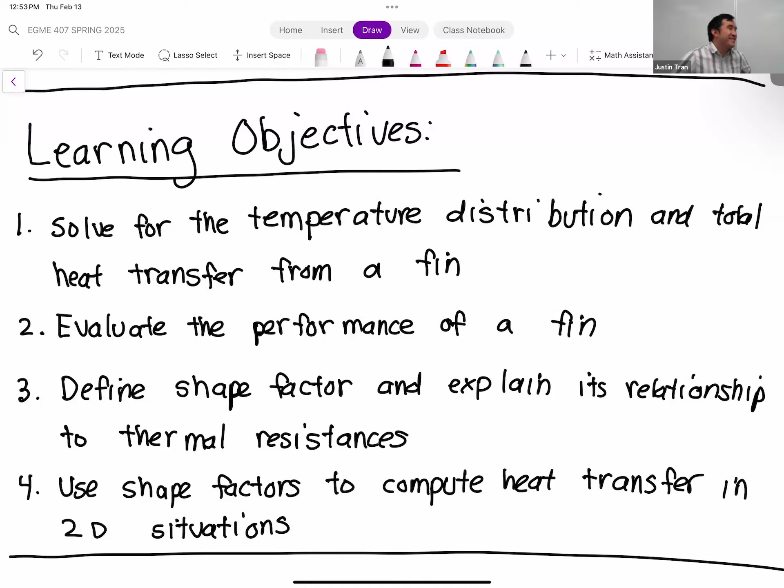Yeah, that's what I was thinking - it's too far, how can it transfer heat? Because heat doesn't transfer well in air, and space is just a bunch of non-solid material. So there's solid, liquid, and air - air would still allow some heat transfer, right? It's probably radiation, or something in space we don't fully know yet, but it's probably from the sun. Is that related to pressure? So space has no pressure, right? Does that mean the heat wave transfers faster with no pressure?

It's not about pressure, it's more about matter. In air there are still molecules - there's monomolecules - and those molecules can transfer heat through conduction or convection. But in space, there's no matter at all, it's just empty. So in those cases, radiation transfers better because there are fewer molecules to refract or block it. But also, in a vacuum, radiation is the only kind of heat transfer you can get, because it's impossible to get conduction or convection in a vacuum.

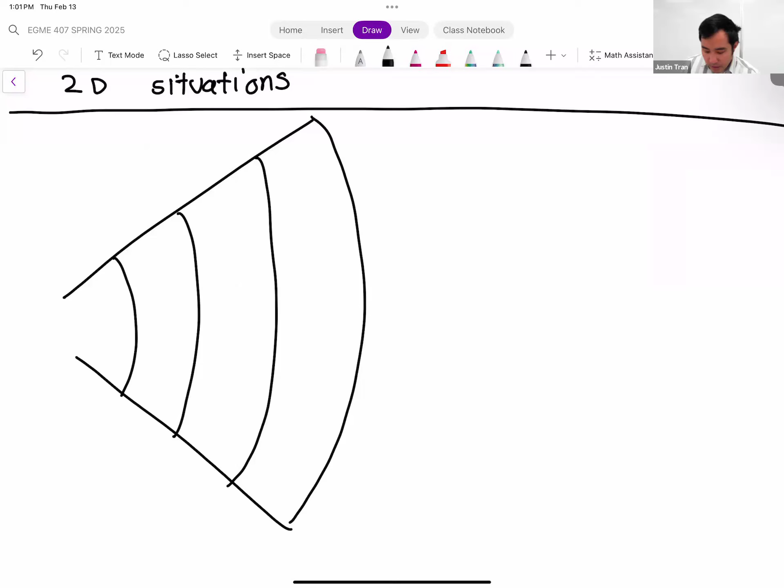Let's say we have 3 layers here, so we have Ka, Kb, Kc - 3 different layers, 3 different materials. In this situation, you would use a different resistor for each layer, so each layer you can plug in a different value for K.

Let's say this is a sphere. The thermal resistance for a sphere is 1 over Ri minus 1 over Ro, divided by 4 pi K. So here's where you plug in for K, but for each layer, you would just plug in a different value of K for each one.

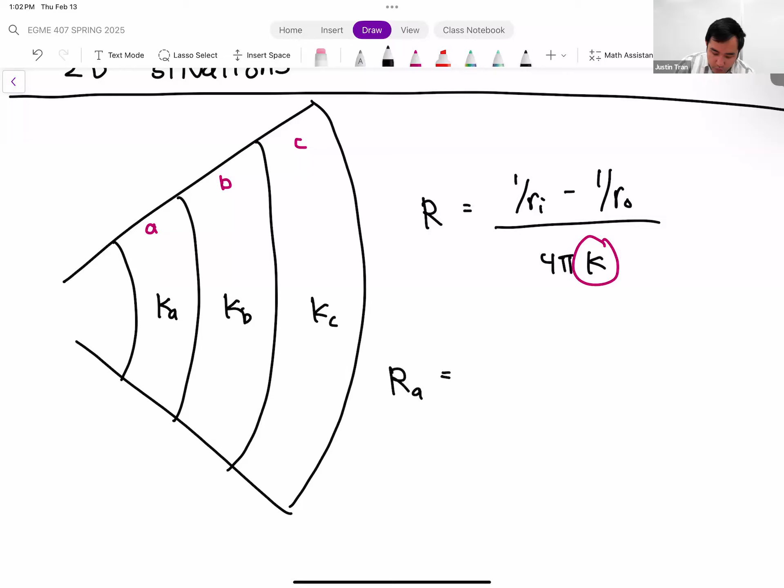So for layer, we'll call this layer A, layer B, layer C. You'll have separate values for Ra. Let me draw some radii here - we'll call this R1, R2, R3, R4. So the resistance for layer A is 1 over R1 minus 1 over R2, divided by 4 pi Ka, because Ka is the thermal conductivity of that particular layer. And then you have a separate resistance for layer B and layer C.

And then when you draw your whole circuit, you'd have 3 resistances - one resistance kind of represents each layer. So Ra, Rb, Rc. And then for each one, you can plug in a different value. Does that answer your question?

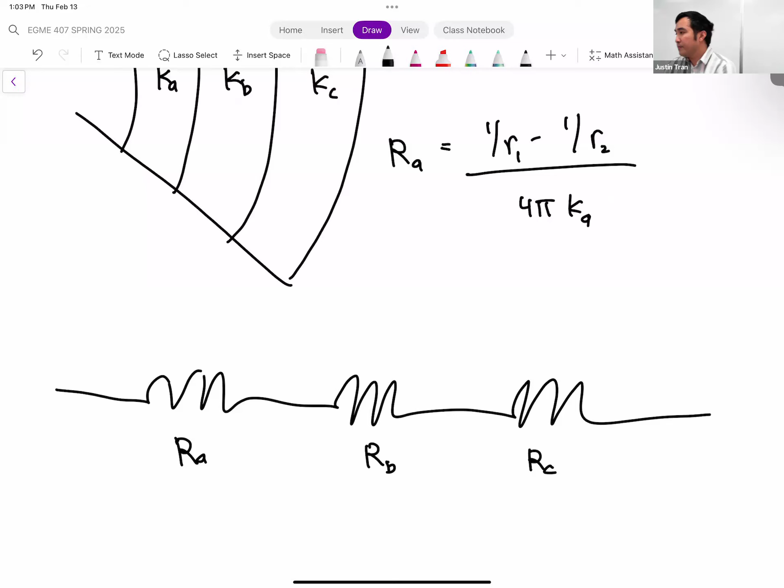Oh, just because I was talking about the critical thickness. Oh, critical, I'm sorry, I missed that one. So for the critical thickness, you would only do it for the outermost layer here. Yeah, because the other ones, they're not on the outside. Okay, I'm sorry, I misinterpreted your question. It's okay, thank you.

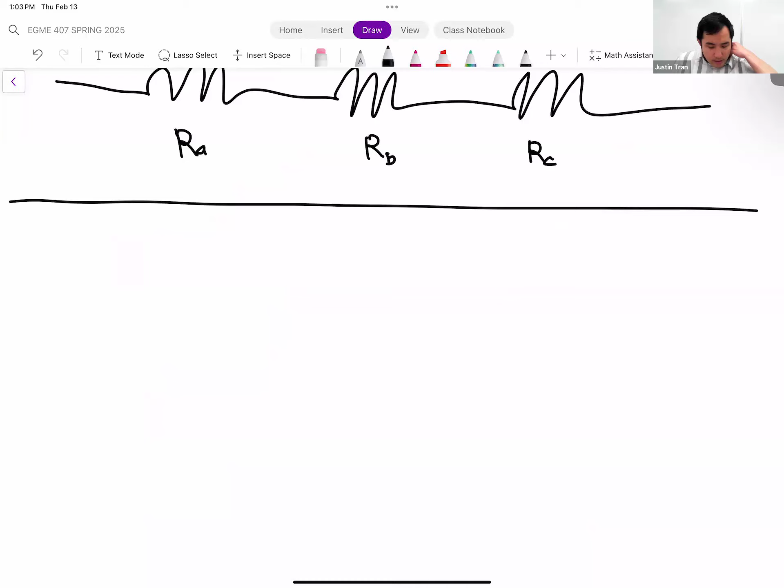So what we were talking about last time was this idea of a fin. Fin is just a short word to describe what we call an extended surface from a system. A fin is something that is very common because if you work on the thermal side of these complex engineering systems, a very common issue is that your system is just producing too much heat. Whether you're working on an engine or on electronics, there's a lot of heat that you need to offload to the environment in order to keep your system cool.

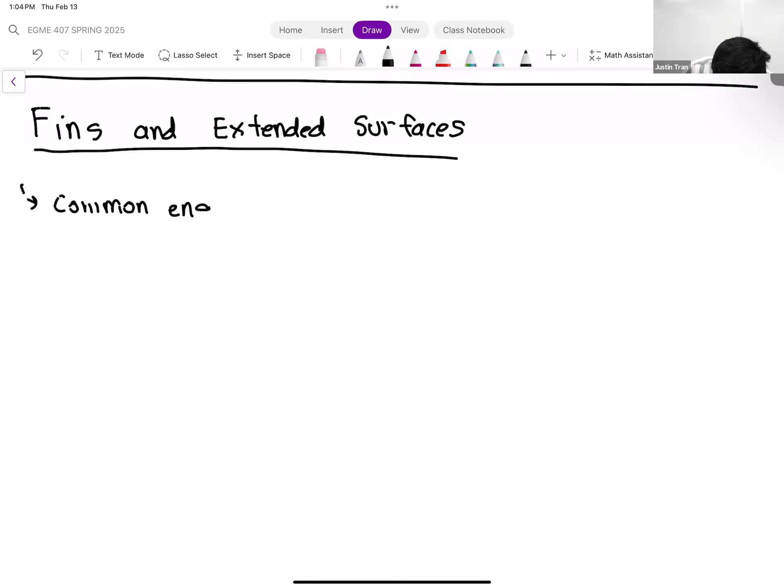One strategy that's often employed to do this is to basically increase the effective surface area of your system so that there's more opportunities, more surface area for convection cooling to occur. So that's the entire premise of a fin or an extended surface - to make these structures to increase the surface area so that more convection can occur to cool your device or your system.

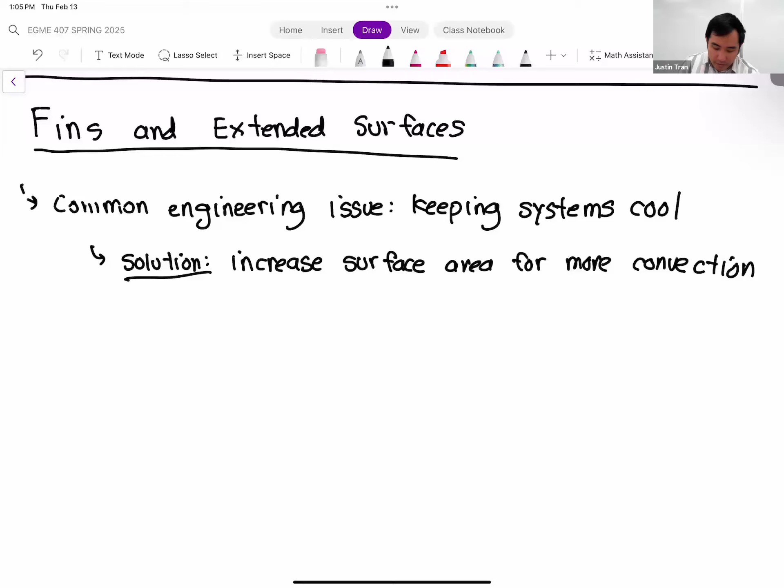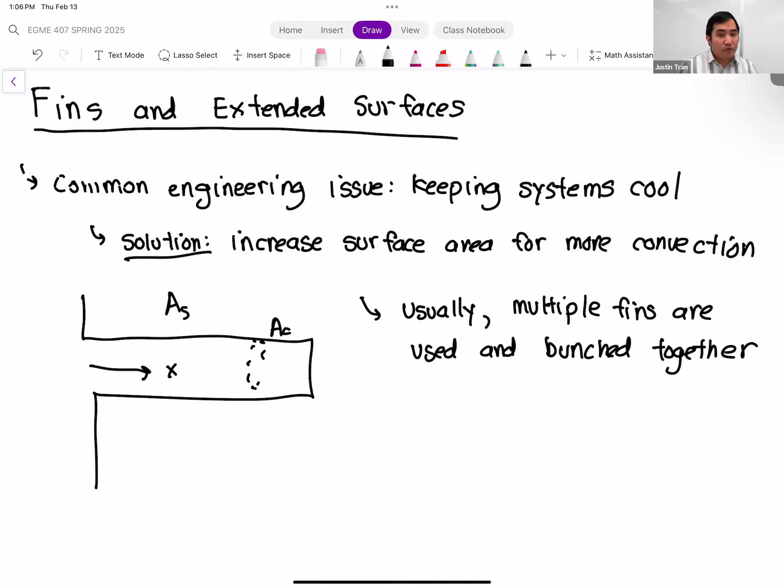This is probably a lot more common that you're going to see in a lot of engineering systems, where you have a bunch of these fins or extended surfaces coming out. So you'll have multiple fins - if you look at it from the side, it might look something like this. If you look at it from above, you might have multiple fins that are kind of stacked like this. So this would be the side view, and this the top view.

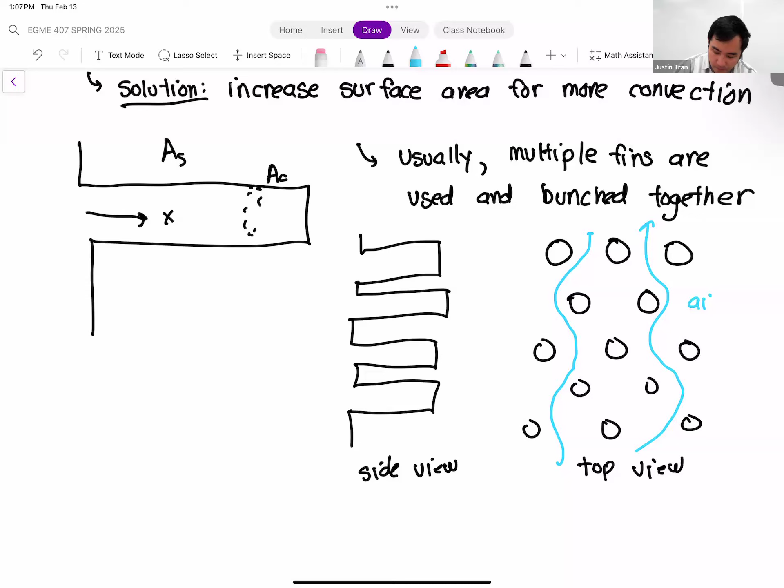Okay. And then what's going to happen in these situations is that air is going to flow through these fins, or some kind of fluid is going to flow. Usually it's air, just because your device is probably exposed to air at some point.

All right, so just because of time, we're not going to get into the theory of having multiple fins stacked together. We're mostly just going to focus on one. But I did want to highlight this because one thing I really enjoy when I learn something new is seeing how it's applied in the real world. If you look inside your engine or your computer, you're not going to see a single fin like this, even though all the theory we're going to discuss is mostly just for a single fin. You're going to have multiple, but know that a lot of the intuition we build up from the single fin applies for multiple fins as well.

It gets actually really interesting because how you arrange your bank of fins can affect the airflow through the fins, and that's going to affect the convection heat transfer as well. So there's a lot of really interesting theory there too, it's just we don't have enough time to go through it. But I did want to mention that before we get too much into the weeds of the calculations.

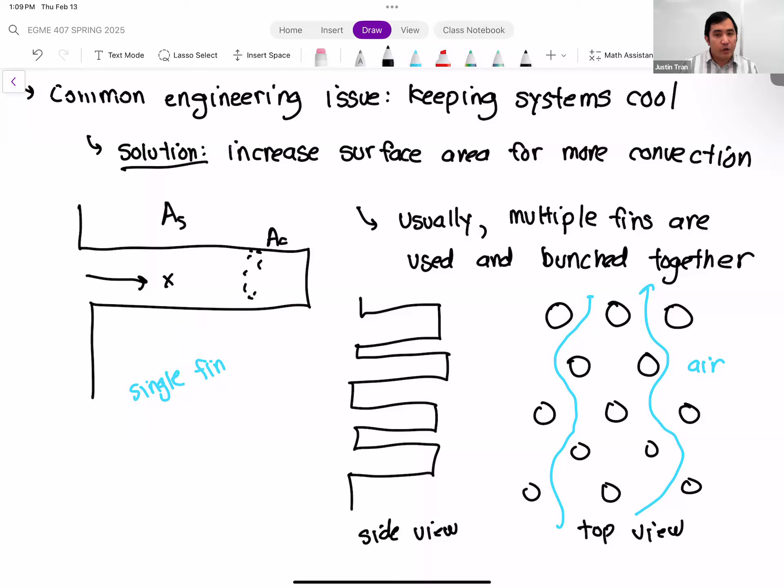Okay, so that's where we're at. So we are looking at fins, and we want to develop some kind of theory or some concepts so that we can better understand fin performance and how to enhance what aspects of the fin are going to lead to better heat transfer or better performance.

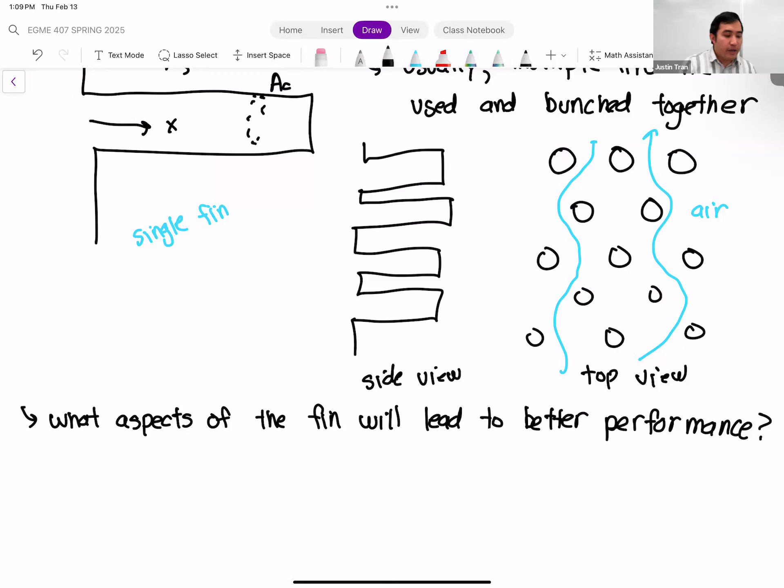That's one of the main questions we're going to answer today. I want you to keep that in mind as we're going through the equations and deriving stuff. Any questions on this so far?

Okay, good. All right, so let's pick up where we left off last time. Last time we were right in the middle of deriving the fin equation, or the fin heat equation.

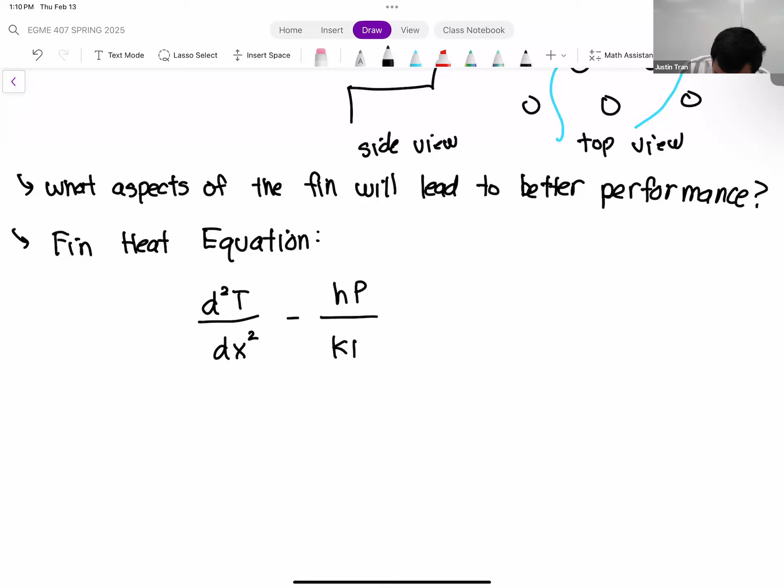Okay, so the fin heat equation looked like the following: d squared T dx squared minus h times P divided by K AC, multiplied by T minus T infinity. All that's equal to 0.

And then right before we left, we said that while this equation is perfectly valid to solve, to make it a little bit easier for us, we're going to make a change of variables.

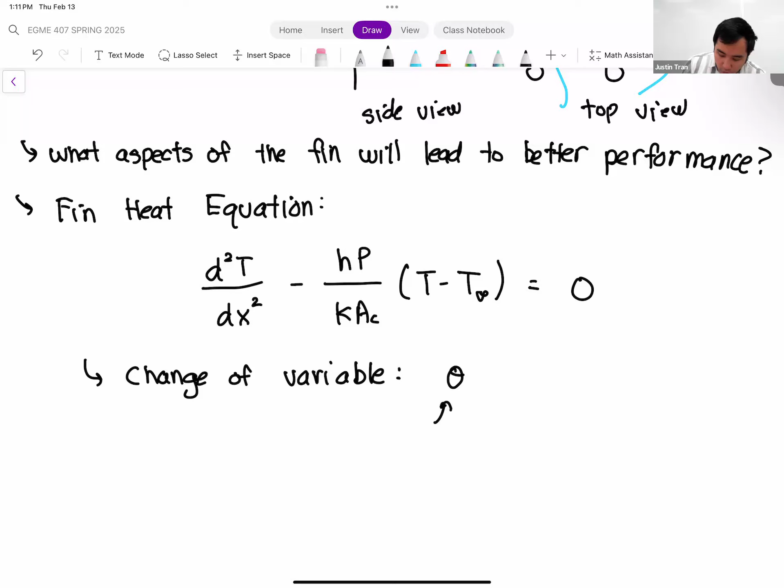And so the change of variable that we're going to do is we're going to substitute in for T. So we're going to define this new quantity called theta. This theta is what's called the excess temperature. What this is, is the difference between the temperature at the fin minus the fluid temperature, T infinity.

And so what this is going to allow us to do is plug in directly for this quantity right here. So this theta is just going to slot in right there. What that does is make this equation homogeneous, which is nice, which is good. And because the change of variable we're doing is essentially just an offset—we're not making any kind of multiplicative change of variables, it's just a subtraction—when we take the derivative of theta...

...second order derivative of theta with respect to x. Since T infinity here is assumed to be a constant, when we take the derivative of this, all we end up with is d squared T dx squared, which means we can just plug this right in for the second order derivative up here.

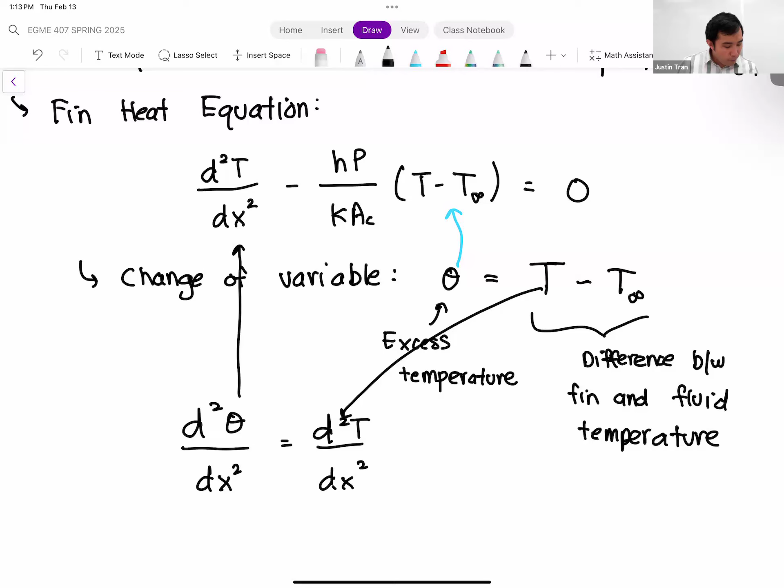All right, so if we perform that change of variables, we end up with the following: d squared theta dx squared minus HP over KAC, multiplied by theta, is equal to 0.

All right, and then what we have here is a second order linear ordinary differential equation with constant coefficients, right? And so this is something that we can solve. If you think back to your 250B class or your 308 class, this is one that we can solve using the characteristic equation.

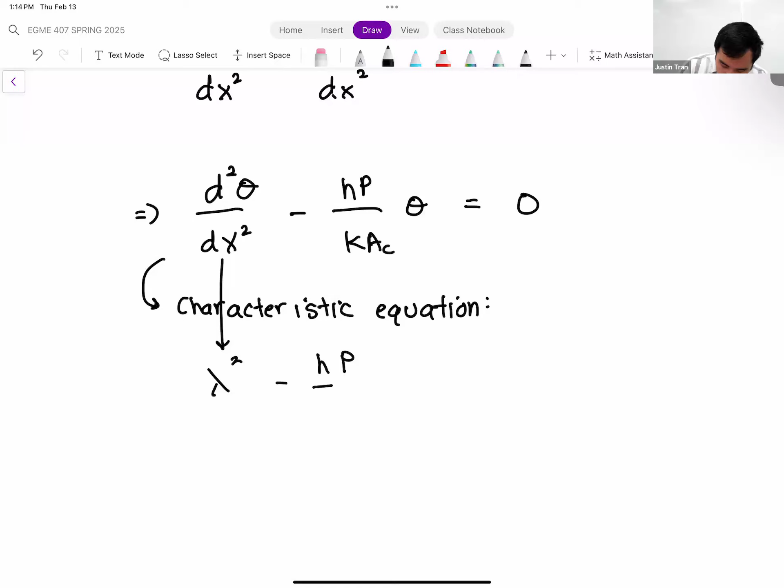Okay, so the characteristic equation, remember, we basically are going to solve for the roots of this equation. So for every derivative here, we're going to replace it with a symbol, lambda. For the second order derivative, we're going to replace it with lambda squared. And then there's no first order derivative terms, so we don't have any lambda terms. And then we're just going to do minus HP over KAC is equal to 0.

Okay, so let's solve for the roots of this characteristic equation. This one's pretty simple, we don't need the quadratic formula for this. We can just add HP over KAC to both sides and take the square root. So we get lambda is equal to plus or minus square root HP over KAC. That means lambda 1 is equal to positive square root HP over KAC, and lambda 2 is equal to negative square root HP over KAC.

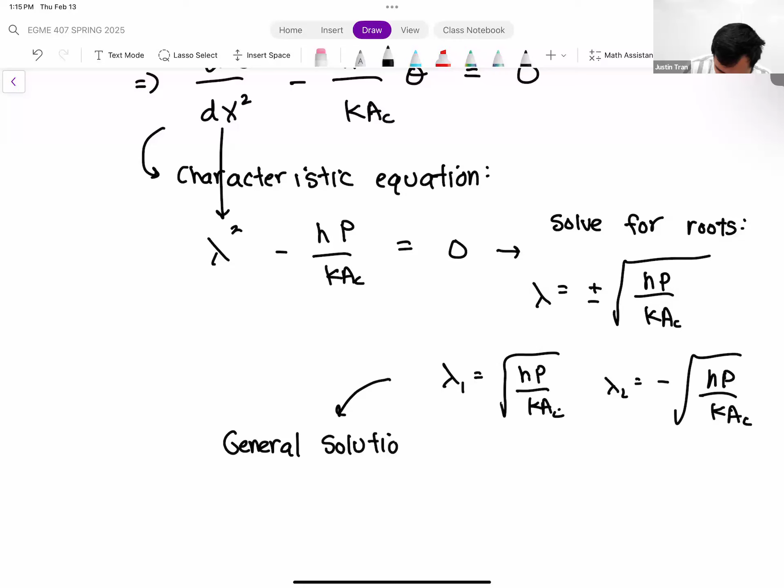All right, so now that we have our two roots, we can form our general solution. The general solution to this problem, theta of x, is equal to — since our two roots here are real, we're not going to have any oscillation, so there's no sine or cosine. We just have simple exponential solutions. So our theta of x is equal to C1 e to the lambda 1 x plus C2 e to the lambda 2 x. And again, this is because we have two real roots.

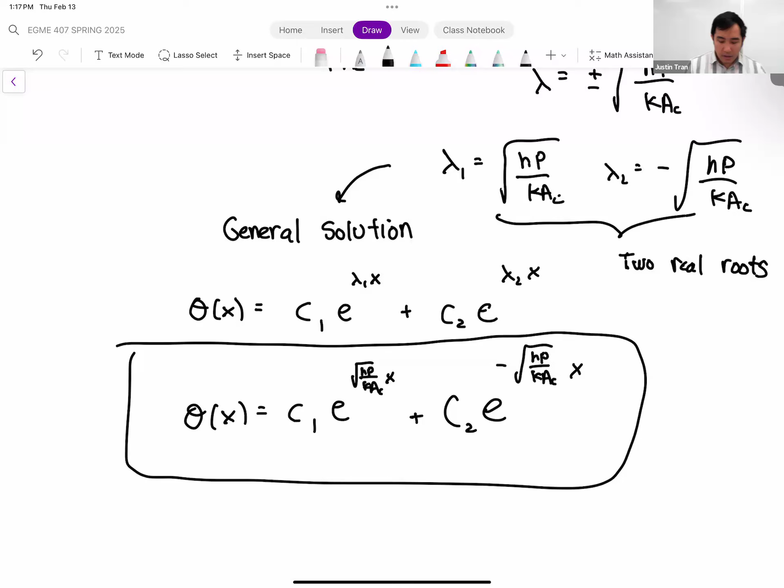Let's go ahead and plug in from lambda 1, lambda 2. We have theta of x is equal to C1 e to the square root HP over KAC times x, plus C2 e to the minus square root HP over KAC x. And this expression that I've boxed right here is the general solution for the temperature distribution, or how temperature varies along the length of a fin.

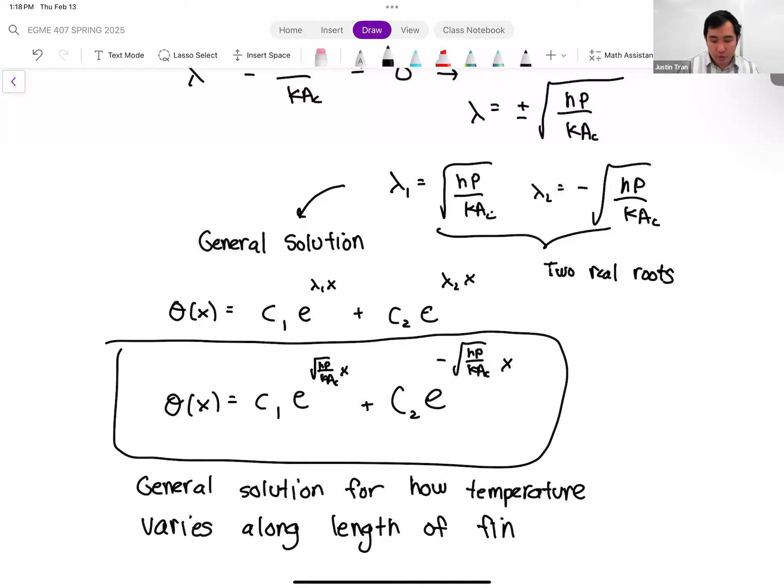Any questions on how we got this result here? Okay, good. All right, so this is a good start, and we can see from here that our solution is exponential in nature. But this is still just a general solution, and this is not the full solution yet. So if you recall from your previous math class, 308, 250b, at this point, in order for us to solve for the full solution, we need to apply boundary conditions and solve for the constants C1 and C2.

So if you notice, that's kind of a big theme of this class — solving differential equations and applying boundary conditions. So what are the boundary conditions that we're going to apply in this case? Luckily, for this part, the boundary conditions aren't really going to change from problem to problem. I know that was a point a lot of people asked questions about on the last two homeworks, but luckily for fins, we're only going to be looking at one given situation. So these boundary conditions are going to be the same for every situation that we look at.

So the first boundary condition that we're going to apply is we're going to apply a known temperature at the base. The base of the fin is where x is equal to 0. Let me go ahead and draw our figure for our singular fin one more time. So our fin looks like this — we know the x direction goes down the length of the fin. The base of the fin is where the fin basically connects to your larger engineering system here. So this part where I've circled is where x is equal to 0.

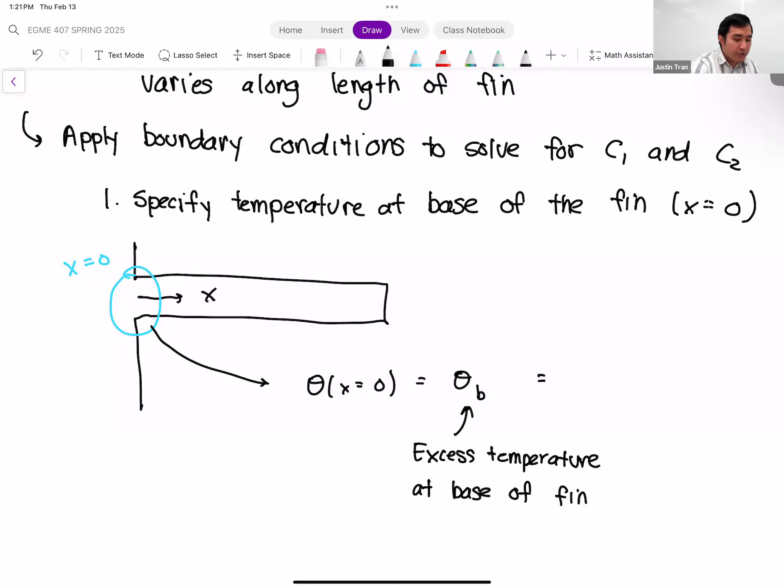And so this first boundary condition is going to specify that we basically know the temperature at the base here. So when x is equal to 0, theta is going to be something, we'll call it theta b — where theta b here is the excess temperature at the base of the fin. Usually this is something that's going to be known. So if you're designing a thermal system, or engineering a system that's going to require a fin, you probably have knowledge of what the surface temperature is at the base of that fin. So this is usually something that's known.

Okay, so this is not something we're making up or assuming. This is usually known in all situations I can think of, especially for electronics, which is where I know a lot about this stuff. It's usually known what your surface temperature is, or at least you know what the worst case scenario for that temperature is going to be.

Okay, so theta B here is nothing more than just the temperature at the base minus T infinity. Remember, this theta is not temperature by itself, it's excess temperature, so you have to subtract T infinity as well. So that boundary condition is pretty straightforward.

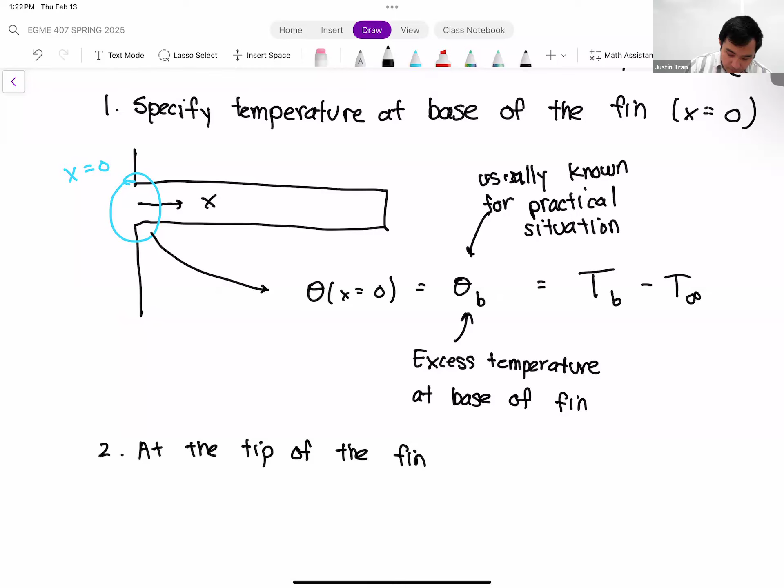The second boundary condition pertains to the thermal situation at the tip of the fin. So we have one condition at the base, and the other boundary condition is going to be at the very, very tip. If we assume that the fin has a length L, that's the total length of our fin, then the tip of the fin is going to be when X is equal to L.

It's just because I think it's one of those things where we could go through the math, and it's not a question of whether you guys can do it or not, you can definitely do it. But I think some of the important messages I wanted to share about fins kind of gets lost in the sauce a little bit. So we're going to focus on just the simplest tip condition.

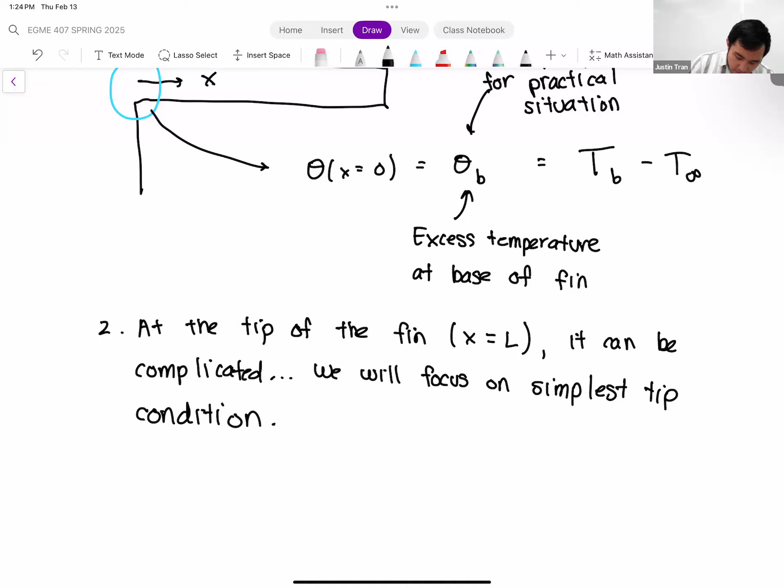Which actually is pretty reasonable, and this is one thing where it's the simplest one, but it's also one that usually makes sense in a lot of cases too. So the tip condition we're going to be assuming is that the fin is sufficiently long.

Right, so let me go ahead and draw the fin here. So what does it mean for a fin to be very long, or how does that actually help us? Question: so like it's not heat soaked and it's like a gradient all the way through kind of thing? Close, I think you have the right idea. So when the fin is very long, basically what's going to happen is that at the very tip, if the fin is sufficiently long, the tip of the fin is going to be the same temperature as the fluid. So it's basically going to lose enough heat so that the tip is the same.

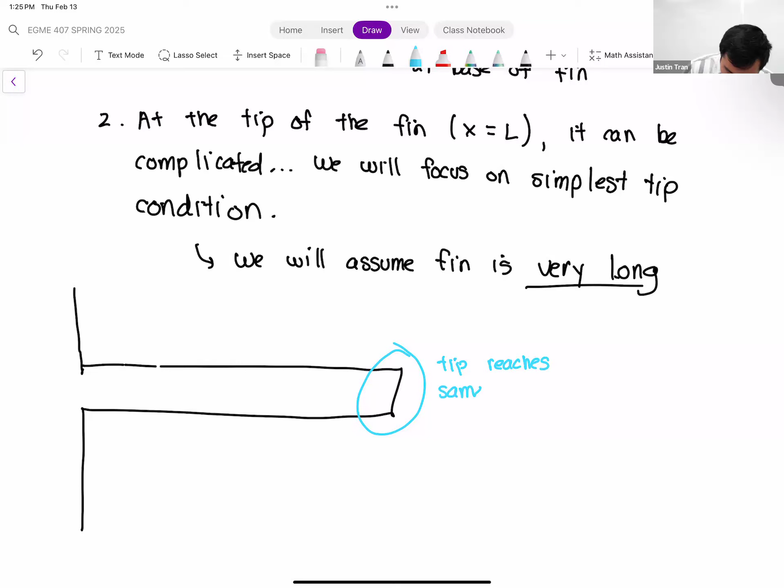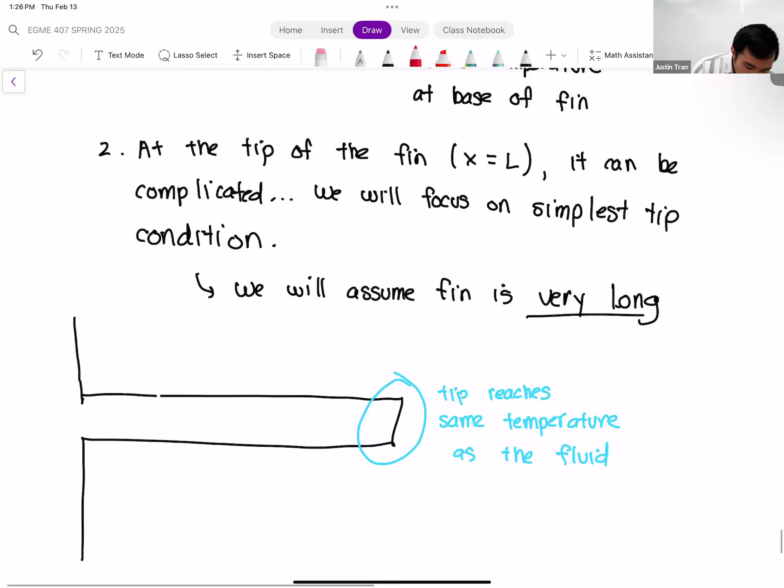Okay, so why is that the case? Think about intuitively what's happening. When you have a fin like this, most of the time, there are reverse situations too. There are some situations where you use a fin to actually heat up your structure, but the vast majority of cases, you have a very hot base. So theta B here is very large.

So in most cases, you're gonna have a large base temperature, and your fin is going to be cooling as you go along the fin. What's happening is that the fluid is passing over the fin itself, and a lot of that heat is actually leaving the fin, it's going into the fluid. So as you go along the fin, what makes sense is that the temperature in the fin is actually going to drop down the length of the fin.

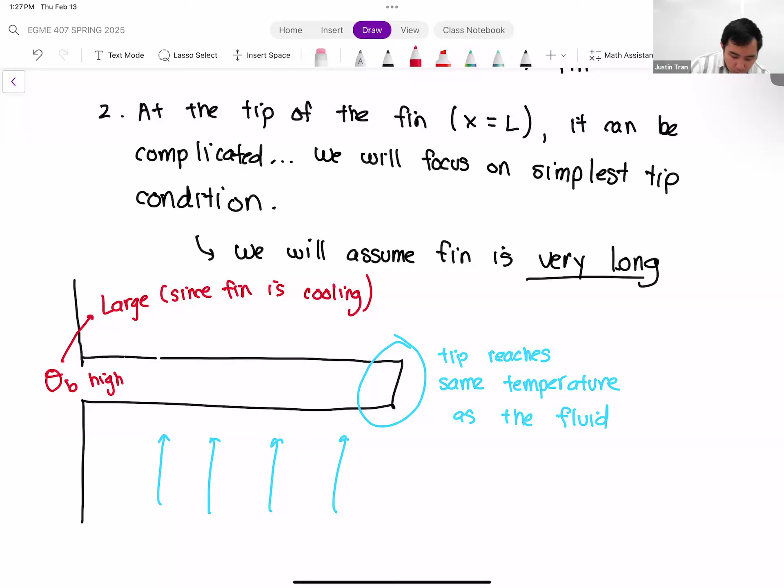So at the very beginning right here, your temperature is very high. But then as you go along, it's going to become slightly less high, and then less high, and then maybe medium, and then low. Obviously I didn't draw this fin long enough, because the fin should be long enough so that as you go along, the temperature decreases more, eventually decreasing to the smallest it can possibly be. And the lowest the temperature can possibly be for this fin is the same temperature as the fluid, because it's impossible for the fin to reach a temperature lower than the fluid.

And so if you have a really long fin, what we say is that at the tip of the fin just reaches the same temperature as the fluid.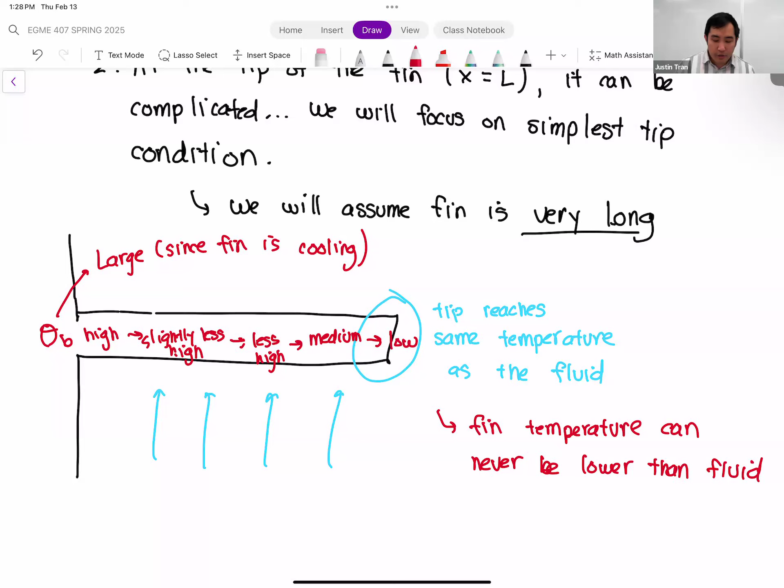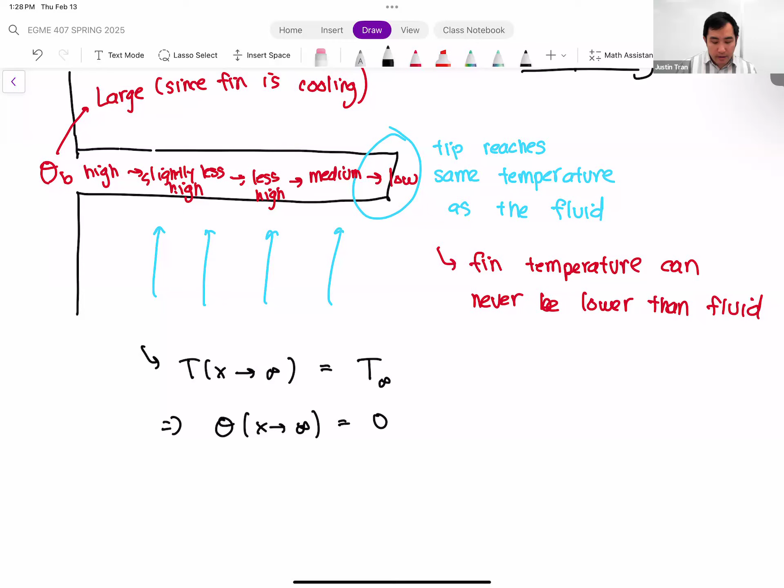Mathematically, this is quite simple to implement. What we're saying is that the temperature, as x approaches infinity, is going to be equal to T infinity. And so the excess temperature as x approaches infinity is going to be 0. Remember, excess temperature is just the difference in temperature between the fin and the fluid. So if the tip of the fin matches the temperature of the fluid, the excess temperature must be 0.

Any questions on the tip condition here? All right, so those are our two boundary conditions. We have this, and condition 1. Condition 1 is theta when x is equal to 0 is equal to theta base.

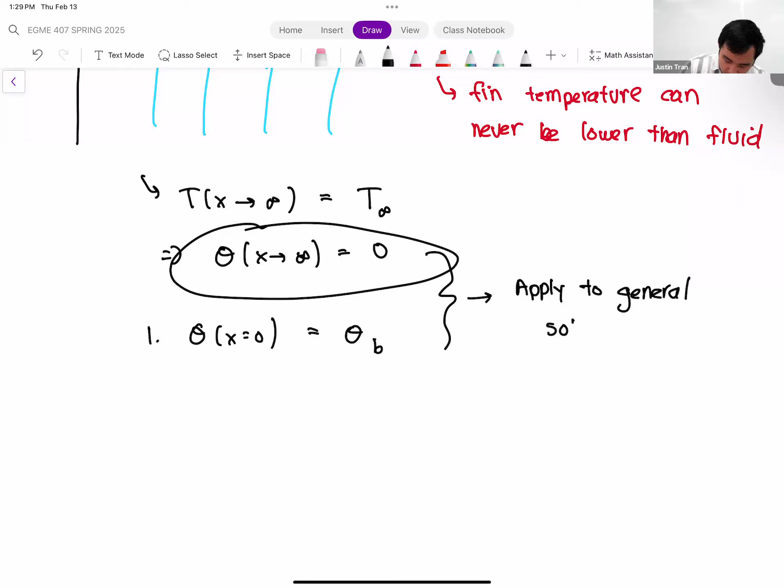Okay, so let's apply these two conditions to our general solution. Our general solution, theta of x, is equal to C1 e to the positive square root of HP over KAC x, plus C2 e to the minus square root of HP over KAC x.

So by applying these two boundary conditions, we can solve for our arbitrary constants C1 and C2. Let's actually apply the tip condition first, because that one's going to simplify things the most.

If we apply our tip condition first, we're going to say theta as x approaches infinity is equal to 0. Let's plug in x. Well, we can't plug in x equal to infinity, but let's just say we're going to take the limit as x approaches infinity of C1 e to the positive square root HP over KAC x, plus C2 e to the negative square root HP over KAC x.

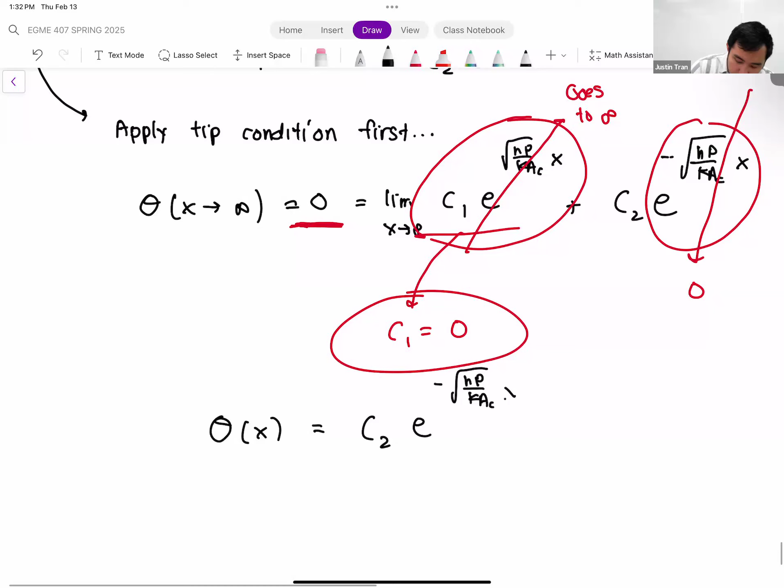And so by doing that, our general solution now is theta of x is equal to C2 e to the minus square root HP over KAC times x.

Can you explain how C1 is equal to 0 one more time? Sure. So we know from our tip condition that basically our temperature at x equal to infinity has to be finite, because we're assuming our fin is really, really long, and we have to have some kind of finite solution there. The C1 term has a positive exponential, so as x goes to infinity, that term is also going to blow up. So in order to be consistent with this, C1 has to be 0, or that term just can't exist.

Any other questions on this part here? What does P represent again? P is the perimeter.

I have a question, but I feel like it'll be answered if we do an example with numerical values. Yeah, we're going to do an example with numerical values after this. Thank you. Yeah, we're almost done with the derivation. That second exponent is negative, right? Yeah, second exponent is negative.

Okay, so let's apply the base condition now, and then we're going to do an example right after that.

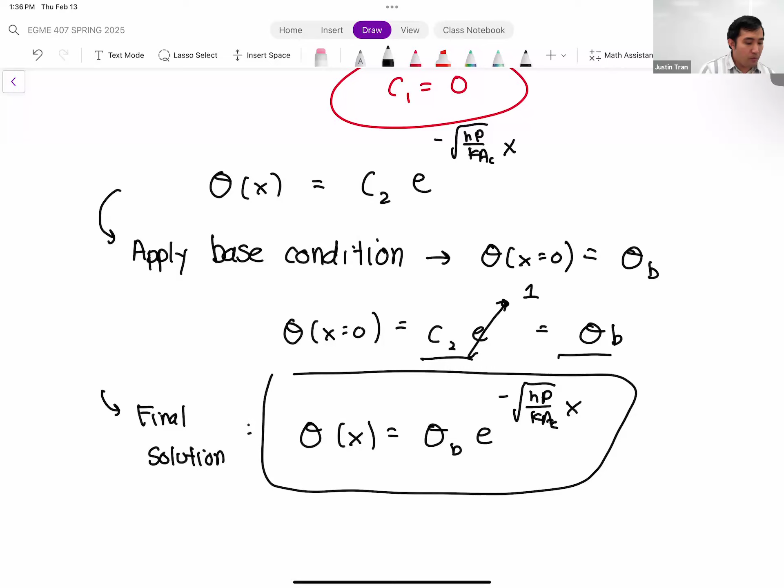Okay, so let's put some numbers on this. We've been going through derivations for a while, so let's see what this looks like in a problem.

Now, one thing you have to consider a lot for the fin: all the theory we just covered, we haven't really made any assumptions on the cross-sectional shape of the fin itself. But that can actually play a really big role. So when you look at examples or problems with fins, the problem will usually tell you what the cross-sectional shape of that fin is. So for this example, let's do a very simple case and look at a cylindrical fin.

So a cylindrical fin has a circular cross-section. So our fin is going to look like this. Now we're being a bit more clear about the cross-section because it's a cylinder.

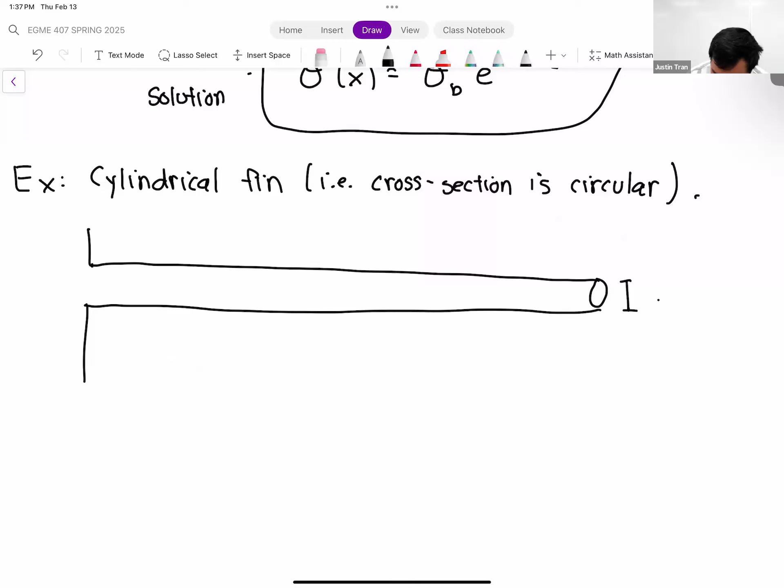Let's say the diameter of this fin is 5 millimeters. Let's say it's made of a material with a thermal conductivity of 180 watts per meter Kelvin. So it's a fairly conductive fin, probably made of some metal.

Let's say that the temperature at the base - now this is just flat temperature, not excess temperature - is 100 degrees C. And let's say the fin is cooled by ambient air, with an ambient temperature of 25 degrees C and a convection coefficient of 100 watts per meter squared Kelvin.

By the way, I think this may be the first time I'm doing this in the class, but notice how in the denominators for these I'm writing K - this K stands for Kelvin. Previously I put the units as degree C. Degree C and Kelvin are interchangeable, but I think this might be the first time I did it this way in class, so I just wanted to make that clear.

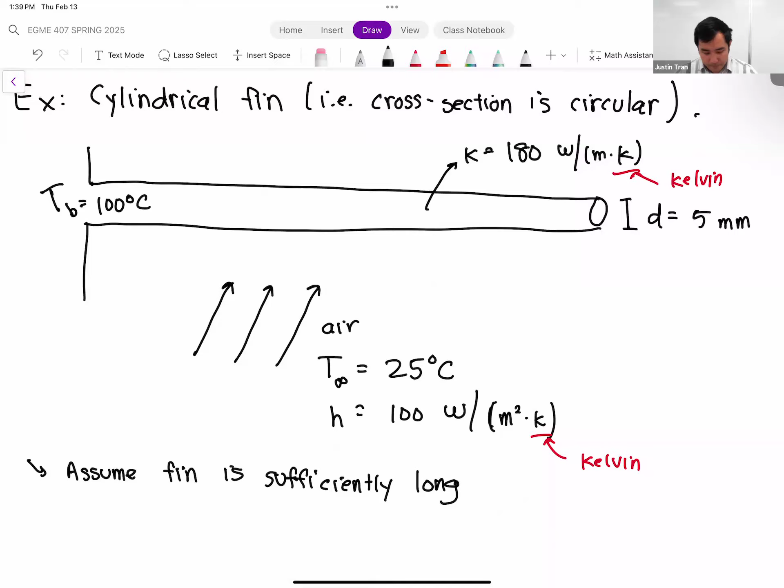So for this fin, let's make the assumption that the fin is sufficiently long, so the tip condition we assumed in the previous part is going to be valid here. So let's answer the following questions.

So this K here is thermal conductivity - it should be lowercase k, and Kelvin is uppercase K. It's just hard to tell because my handwriting is poor. If the K is on the right in the units, that stands for Kelvin; on the left-hand side it's thermal conductivity. Let me make this clearer - instead of Kelvin on the bottom here, let me change this to degrees Celsius.

But on the homeworks you may see Kelvin K, so just be aware of that. They are equivalent in magnitude - they're just offset from each other. Temperature in Kelvin is equal to whatever is in degrees C plus 273.15. But the actual value, if you wanted to go from degrees to Kelvin, you just keep it as 180 - the value of thermal conductivity or convection coefficient doesn't change whether it's Kelvin or degree C.

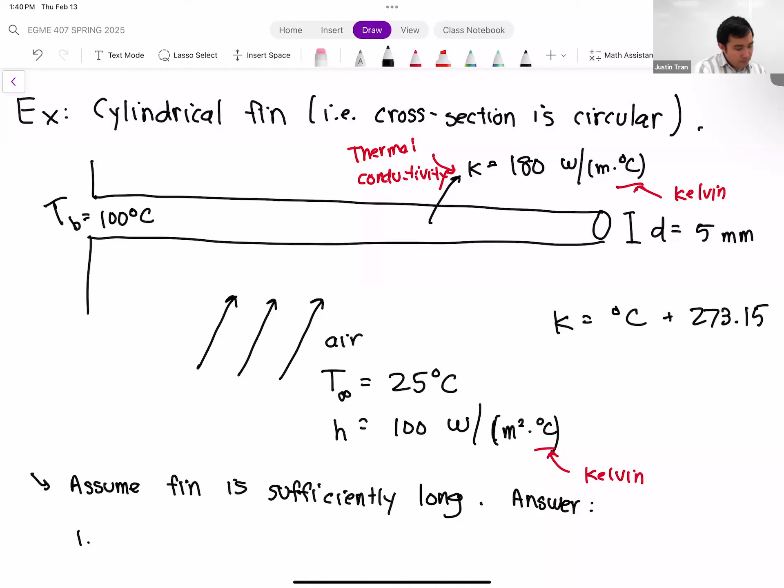Okay, so let's answer the following questions. First one is, let's solve for the temperature distribution in the rod, or I guess the fin, I should say.

Number two, let's compute the total amount of heat transfer from the fin.

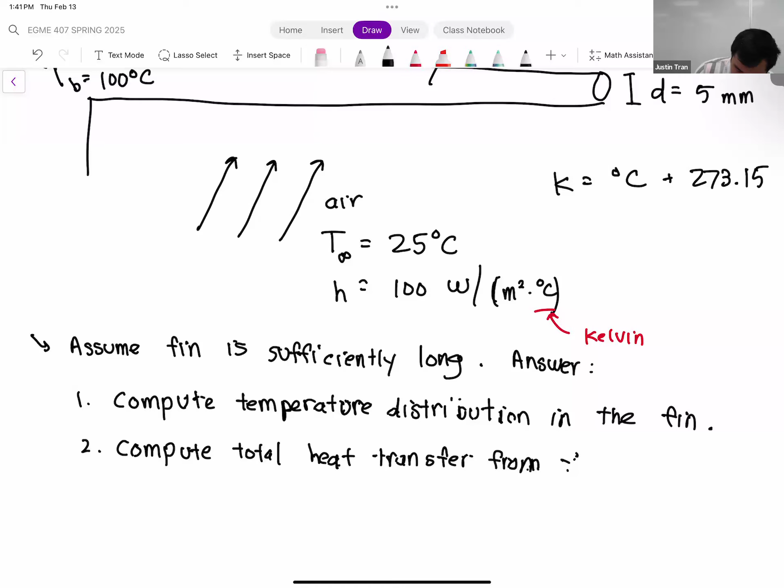And then number three is going to be an interesting one, because we've solved for the solution to the fin equation assuming our fin is sufficiently long. So part three is let's solve for what the theoretical length of this fin should be in order to make that assumption valid - how long does the fin have to be?

Because those words kind of get thrown around a lot, sufficiently long, sufficiently small, infinitesimally small. So let's actually compute it, let's see what that means in this case, and mathematically how we can show that.

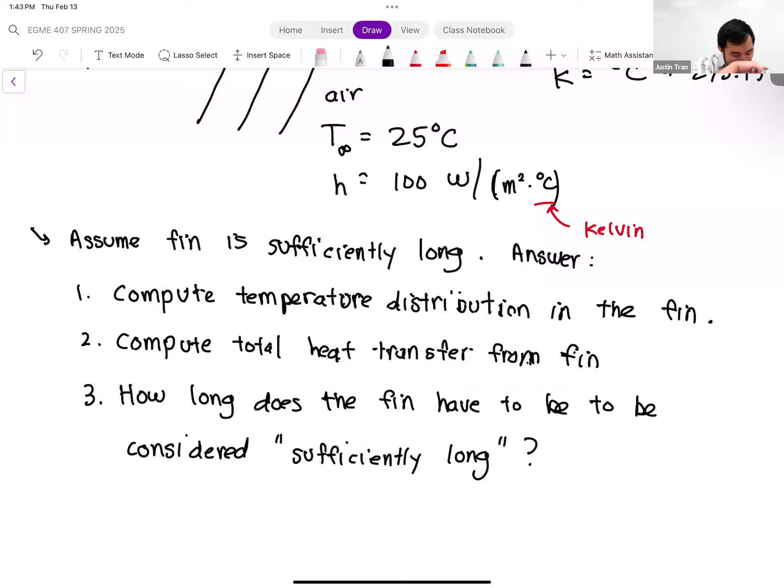All right, so let's start with the temperature distribution. This one is pretty straightforward because we've already solved for it. The temperature distribution in a fin is given by this, what we just finished deriving here.

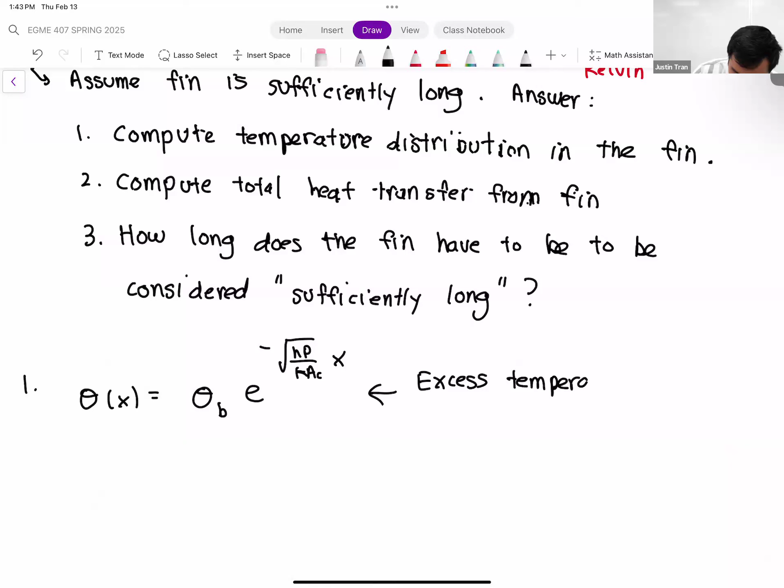So theta of x is equal to theta B multiplied by E to the minus square root of HP divided by KAC times x, okay? That right there is our temperature distribution, or more specifically, the excess temperature distribution. So to get the full distribution here, we just have to plug in for all the numbers.

Quantities like H, the convection coefficient, and K, those are already given to us in the problem, so there's nothing additional we need to compute there, we just plug it in. But we do need to compute values for theta B, for the perimeter, as well as the cross-sectional area.

Okay, so let's start with theta B, that's the simplest one. Theta B here, remember, this is the excess temperature at the base.

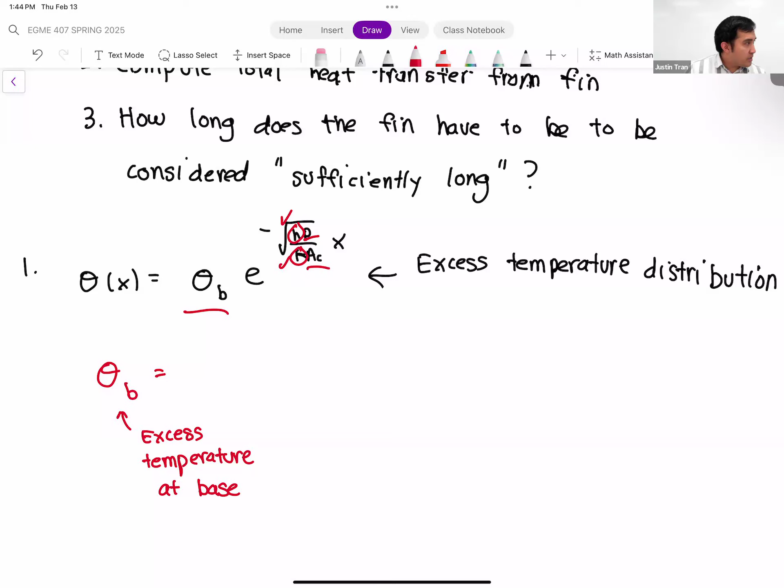In the problem, we're not given the excess temperature at the base, we're given the temperature at the base. So if we go back to the problem, we know the base temperature is 100 degrees C, and so the excess temperature there is going to be 100 degrees C, the temperature at the base, minus T infinity, where T infinity is the ambient temperature of the air. So we have 100, ambient temperature is 25, so we just have 100 minus 25, and so the excess temperature here is going to be 75 degrees C.

Okay, that one's pretty straightforward. Let's compute the perimeter next. Remember when we first started this example, I told you that fins can come in lots of different shapes. In this case, we have a circle, and so the perimeter here is going to be nothing more than just the perimeter of the circular cross section.

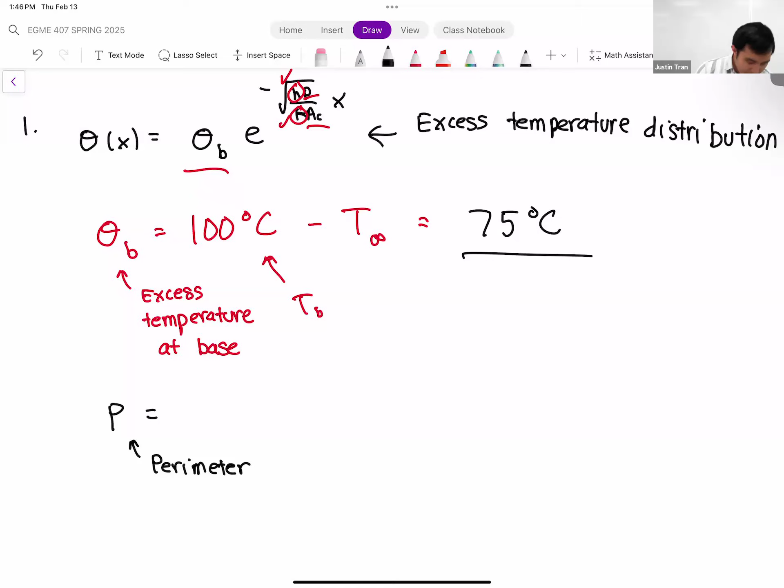Circumference, yes. Okay, so since we have a circular cross section here, the perimeter is just going to be the circumference of a circle, so that's going to be pi. We're actually given the diameter in this case, so it's going to be pi times the diameter, that's pi times the diameter of 5 millimeters.

So 5 millimeters is 0.005 meters, and we're going to compute everything in standard SI. Let me compute this really quick. So the perimeter here is 0.0157 meters.

And then the cross-sectional area, we're just going to take area of a circle, which is pi r squared. We're not given r, we're given d, so it's going to be pi times d divided by 2, squared. And so that is 0.0025 times 0.0025 times 3.14159, so this is 0.00001963 meters squared.

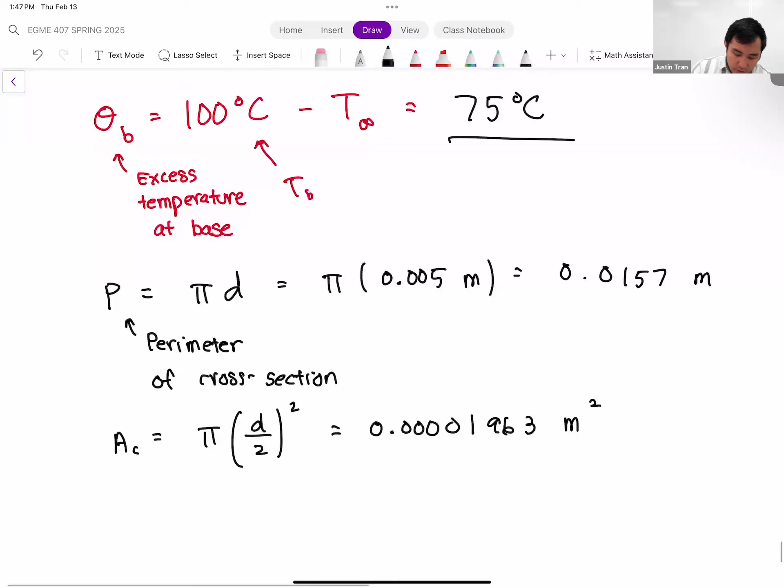Okay, so let's plug all that in. Let me compute the exponent first. So the exponent is square root of HP divided by KAC. We just computed P, we just computed AC, convection coefficient H, thermal conductivity K are all given to us in the problem, and so we plug everything in, we get 21.08. The units for this, if you're curious, is meters minus 1, so it's 1 over meters.

Okay, so we have all of the numbers here, let's just plug it all in. So our temperature distribution theta of x is equal to 75 e to the minus 21.08 x.

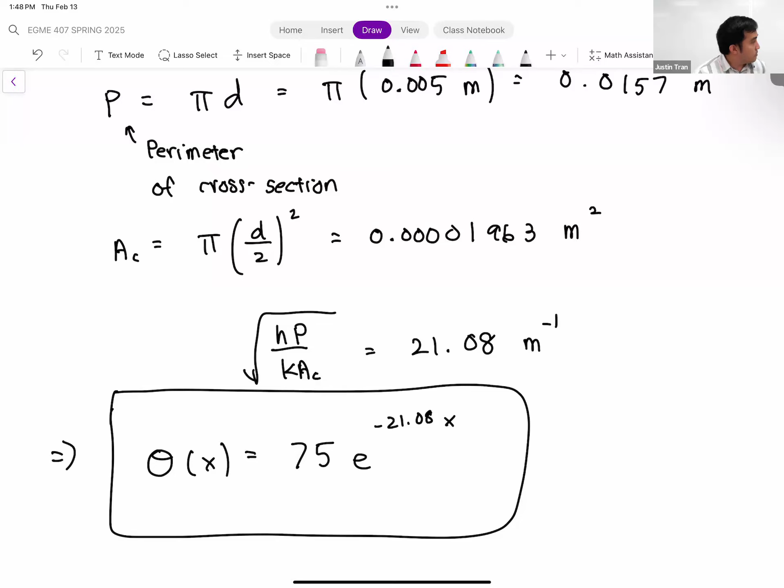All right, any questions on this part here? Okay, so that's part 1 of the problem. Part 2: now that we have the temperature distribution, we can compute the heat transfer rate or the total heat loss from the fin.

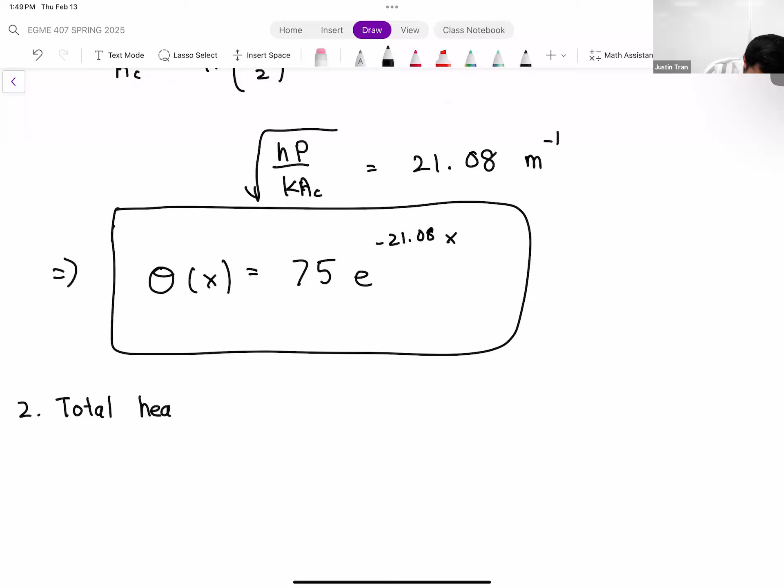All right, so for heat loss, we're going to make use of our handy dandy formula that we've used a lot this class already. Now that we have a formula for the temperature distribution, finding the heat loss is just making use of Fourier's law. Fourier's law states that the heat loss or heat transfer rate for a given problem is equal to minus K times A, dt dx.

Okay, so of course we don't have T, we have theta, but T and theta are essentially interchangeable here. So let's take the derivative of theta,

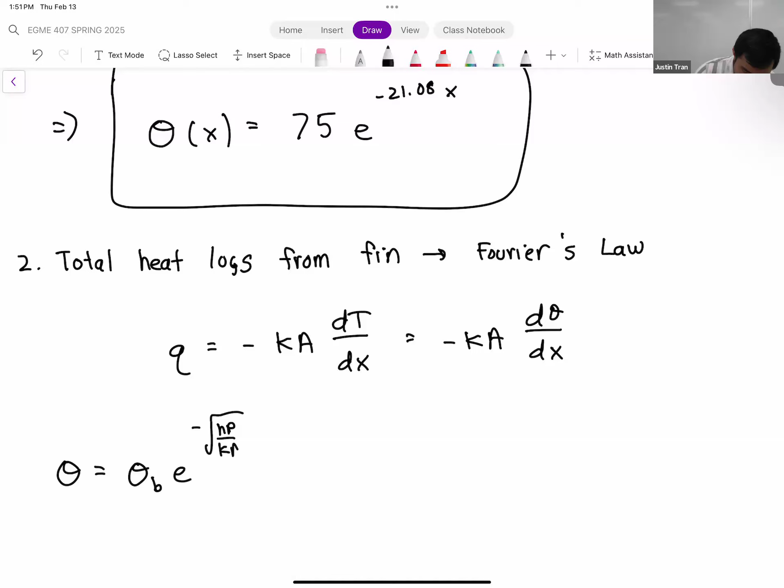which is minus KA d theta dx. This is actually a formula that's very useful, so I'm going to do this in terms of the general theta. If theta is equal to theta B e to the minus square root of HP over KAC times X, if we take the derivative of this, it's equal to minus theta B square root of HP over KAC, e to the minus square root of HP over KAC times X.

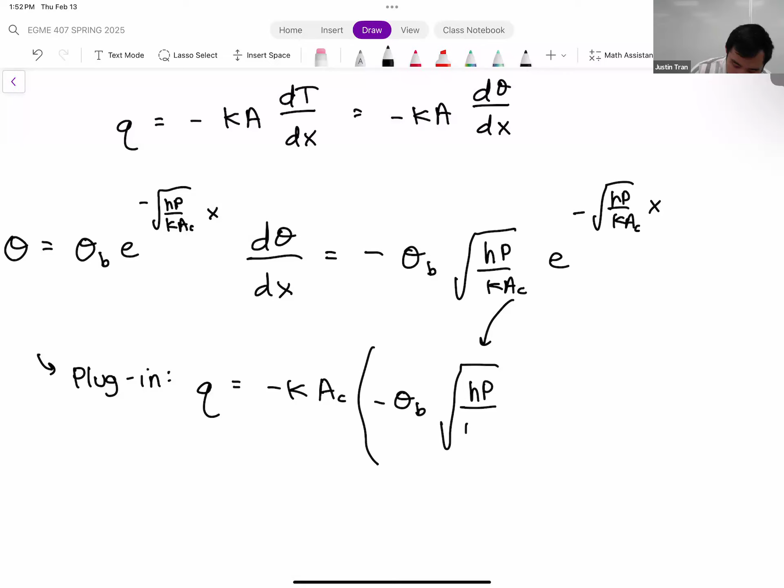All right, so let's go ahead and plug that in. We plug in for this, we get Q is equal to minus K. That area there is cross-sectional area, so we're just going to do KAC multiplied by our derivative. We're just going to drop this guy in here: minus theta B square root of HP over KAC, e to the minus square root of HP over KAC times X.

Why don't you use the general solution that you just solved? So this formula for the heat transfer is going to be useful for every problem. We're deriving it just from the symbols, and then we're going to plug in the values from this problem afterwards. Because in the homework you'll see questions of how to compute the total heat loss, and I'd rather you just have a formula that you can plug into instead of deriving everything.

All right, so let's simplify this. If we simplify, the negatives are going to cancel out. So we have a KAC up top here and a KAC under a square root on the bottom. If you work this out, we're going to get Q is equal to theta B square root -- that KAC actually goes within the square root there -- square root of HP KAC, e to the minus square root of HP over KAC times X.

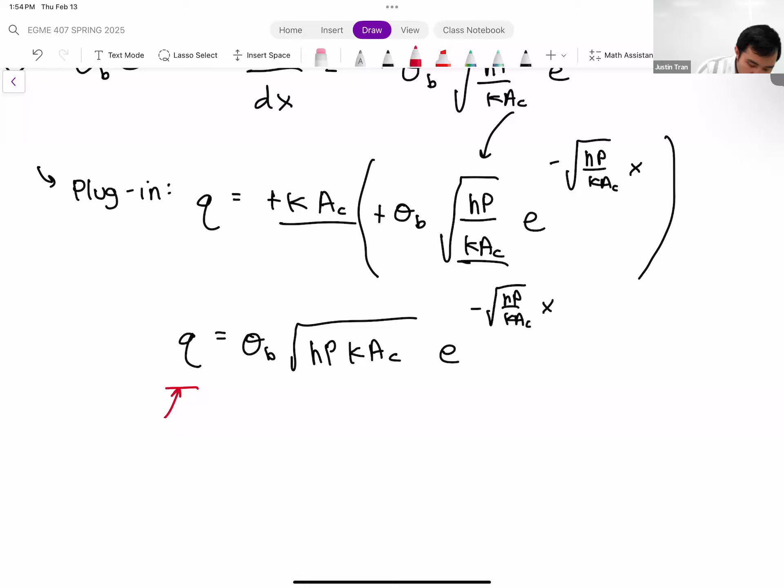So this is good, right? We've simplified this expression quite a bit, but it's still not the easiest to work with right here. Because what do you notice here? This is an expression for Q, an expression for heat transfer rate, or heat loss -- I should say heat transfer rate in the fin.

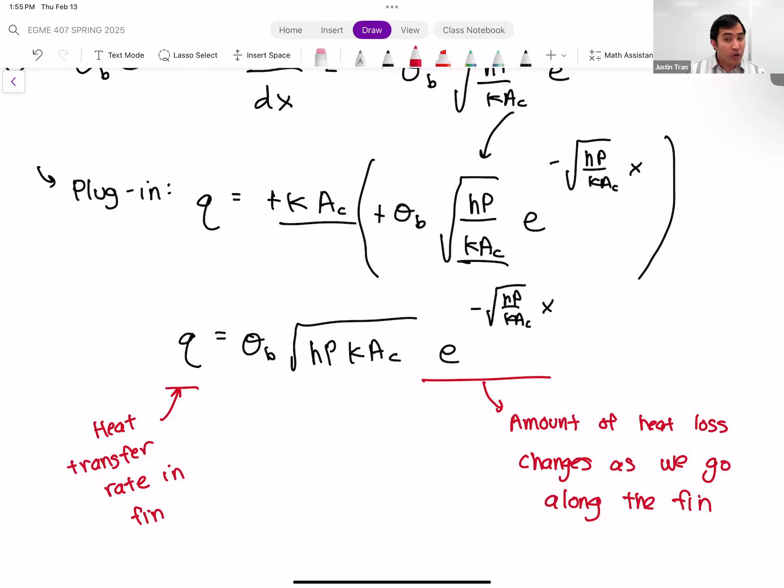But if you look at this expression here, we still have a dependence on X, right? And the fact that this term here still exists means that the heat transfer in the fin changes as you go along the fin. If you remember the figure I drew earlier where the temperature changes, it goes from high to slightly less high to less high to medium -- because the temperature is dropping along the fin, that means the amount of heat transfer as you go along the fin is also going to change.

So if we draw it out, we draw our fin just like this. We have air blowing through it. Let's compare five different values of Q here along the fin -- I'll call this Q1, Q2, Q3, Q4, Q5. And if we go based on the formula above, that means the instantaneous amount of heat transfer coming out depends on where you are located along the fin. So Q1 is going to be greater than Q2, which is greater than Q3, which is greater than Q4, which is greater than Q5.

So most of the heat transfer or heat loss is going to take place at the base of the fin. And then as the fin cools down as it goes along, there's going to be less and less heat transfer.

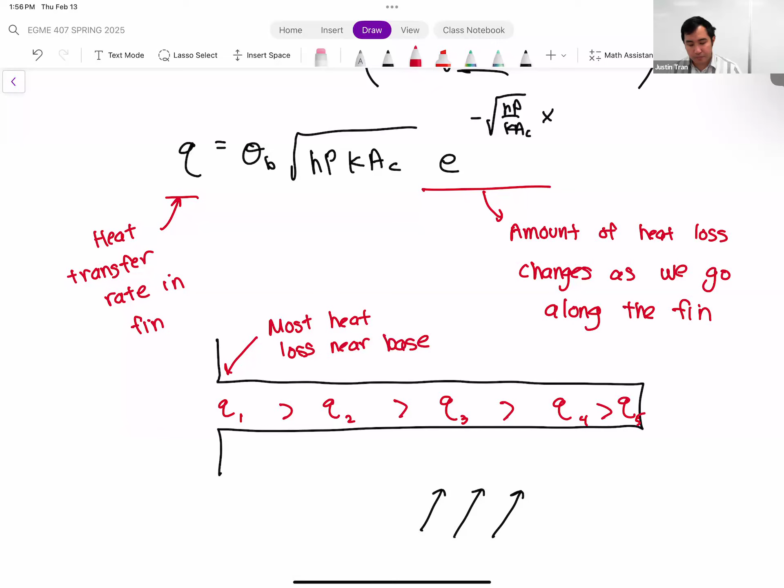And that makes sense, right? Because we know that the temperature is going to be highest at the base. And if we follow the cardinal rule of heat transfer, if the temperature difference is highest at the base, that means the heat transfer there is going to be the highest as well. Hopefully that makes sense -- the more temperature difference you have, the more heat transfer is going to occur.

This formula, because of that, is not that useful to us because it's still a function of x. So what we would like to see is a formula that just basically computes the total amount of heat loss from this entire fin.

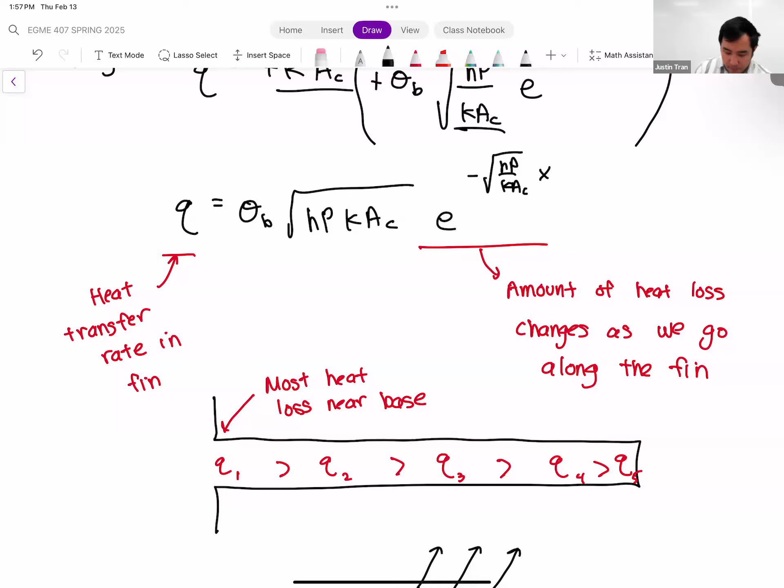We tried, actually, like this for our next one. Took me a second. I was like, yeah, we can. Wait a second.

Okay, because ideally we have all the numbers for this fin here, so it would be ideal if we can just compute: this fin is going to lose this amount of heat, and so we can just put a number on it. Turns out we can't.

And we can do it by just making one very simple kind of plug in, okay? Or I would say one very important kind of observation, and that will allow us to plug something in.

So this fin is made of some kind of material that is 100% of the time going to be some kind of inert material. So it's not going to be material that's producing heat, okay? So if we remember that, then all of the heat being lost from the fin has to pass through the base at some point.

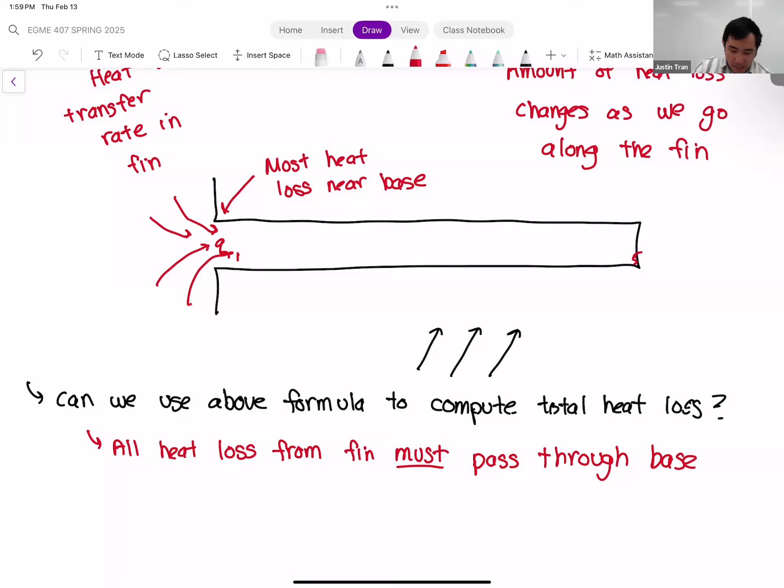So what this means is that if we compute the Q at x equal to 0, okay, what this does is this actually represents the total heat loss for the entire fin. And that's really helpful for us because if we plug in x is equal to 0, then this expression here becomes quite simple.

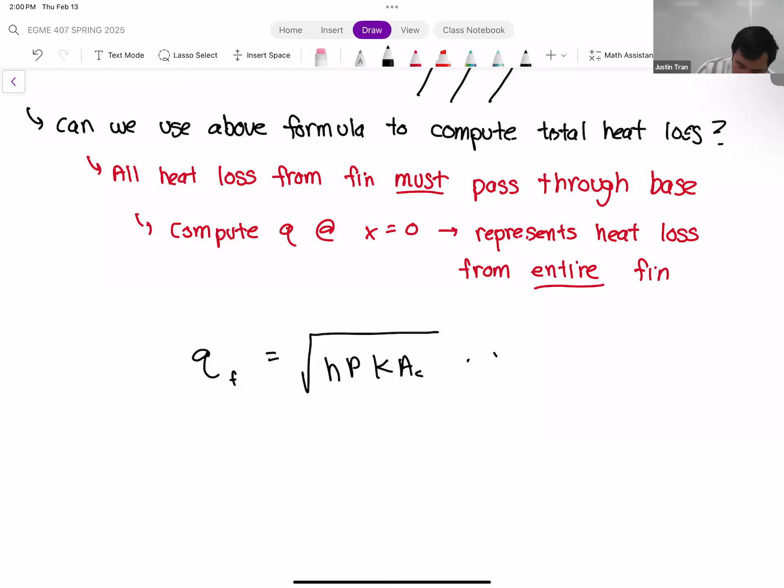Okay, so if we plug in x is equal to 0, we get Q. I'm going to box this equation, so I'll call this Q fin. So QF is equal to square root of HP, KAC, times theta base, and that's it. Because when we plug in x is equal to 0, then that exponential term essentially just goes away because it equals 1.

Okay, so this is great. So this right here represents total heat loss from a fin.

Probably one of the most useful formulas that you'll get from this class, because it's something you can compute just right off the cuff. So if you're designing a fin for a thermal system, you can see exactly how much heat loss that fin will produce based on its geometry and based on the properties of the material and the surrounding fluid.

Okay, so if we plug that in, what we get is QF is equal to 5.6 watts.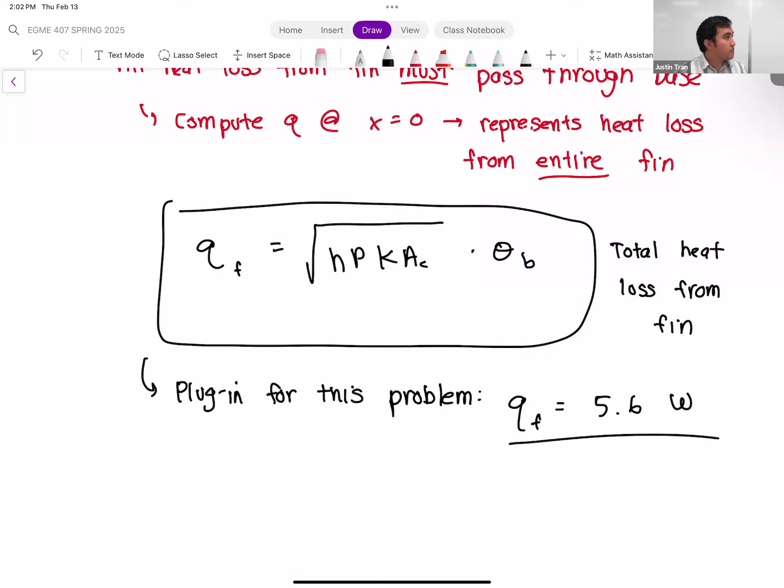Right, yes. So I think it's worth mentioning how the fins can get really complicated, but if they are sufficiently long and you have multiple of them, you can't just multiply per fin. So this one right here would probably be the upper limit of the heat loss. So I think that's still useful. And probably in reality, it's not going to reach this level of performance if you have multiple fins stacked together. So it wouldn't just be 5.6 times 10.

Because, you know, it's going to depend on the airflow. The air is also going to heat up locally too. But this at least sets an upper bound. So this tells you, if you need to offload, let's say 50 watts of heat, then you need probably at least 10 fins. So that can still be useful in those situations.

Ballparks, yeah, like the ideas. Exactly, yeah. All right, any other questions on this here?

Okay, so the last part of this example, kind of just the fun part here. So if you remember from the original example, this part asks how long does the fin have to be considered sufficiently long?

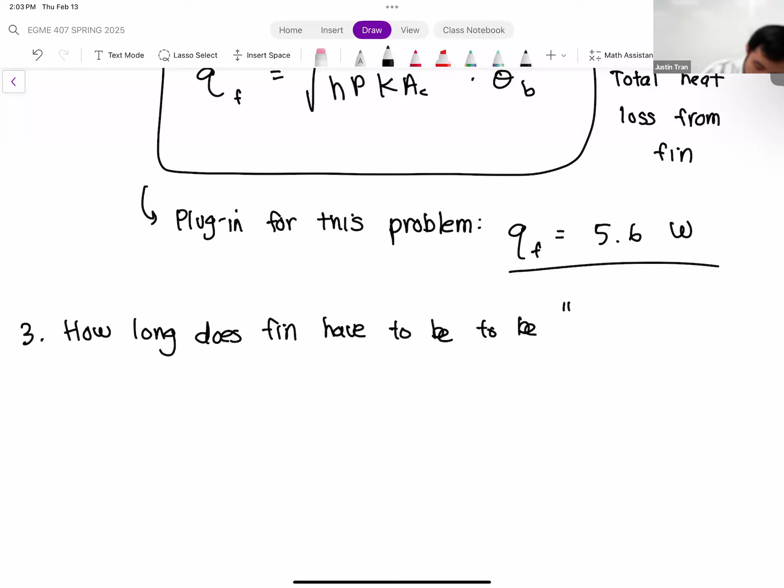What's fascinating about this whole example is that we've done all these calculations, we even computed the total heat loss, and we don't even know how long the fin is at this point. But this is obviously very important to know if you're designing your fin, right? There's a difference between a fin that's 50 centimeters versus a fin that's 5 meters long. So you want to know these things.

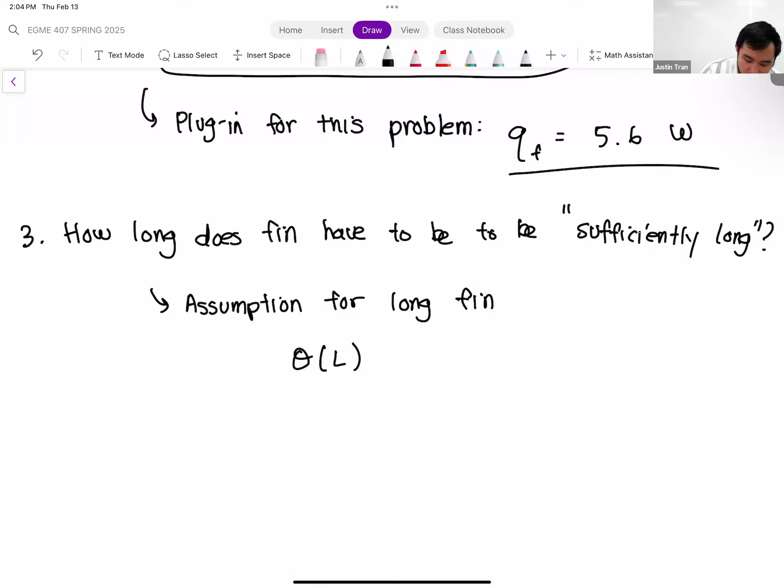Remember, the assumption for a long fin basically states that if you evaluate the excess temperature at the length of the fin, this is going to be essentially 0. In other words, the tip of the fin is the same temperature as the fluid. So we need to solve for the value of x that makes this true.

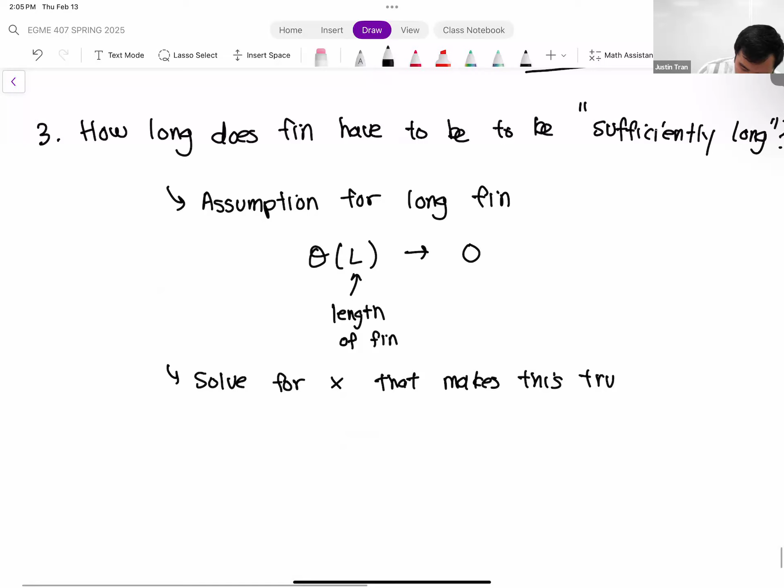Let me write out our general solution here. We have theta of x is equal to 75 e to the minus 21.08 times x. So basically, we need to determine what value of x is needed to make this go down to 0. The thing is, with a decaying exponential like this, it's actually impossible to get it down to exactly 0. I know we always make that approximation that an exponential with a negative exponent goes down to 0, but it never actually equals 0. So we have to make an approximation here.

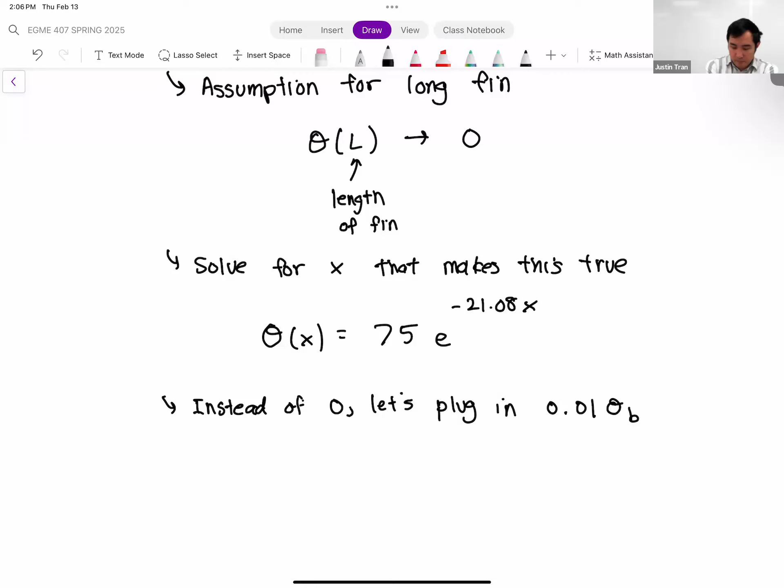So instead of 0, how small does that temperature difference have to be in order to be considered effectively 0? You can have different criteria, but this is the criteria I use: if that temperature difference is only 1% of the base temperature difference, then we say that's effectively 0. So let's plug in 0.01 theta B. We have 0.01 theta B is equal to 75 e to the minus 21.08 x.

Let's solve for this. Theta B is 75, so actually both of the theta B's cancel out. Then we have 0.01 is equal to e to the minus 21.08 x. Let's solve for x by taking the natural logarithm of both sides. We have x is equal to natural log of 0.01 divided by minus 21.08.

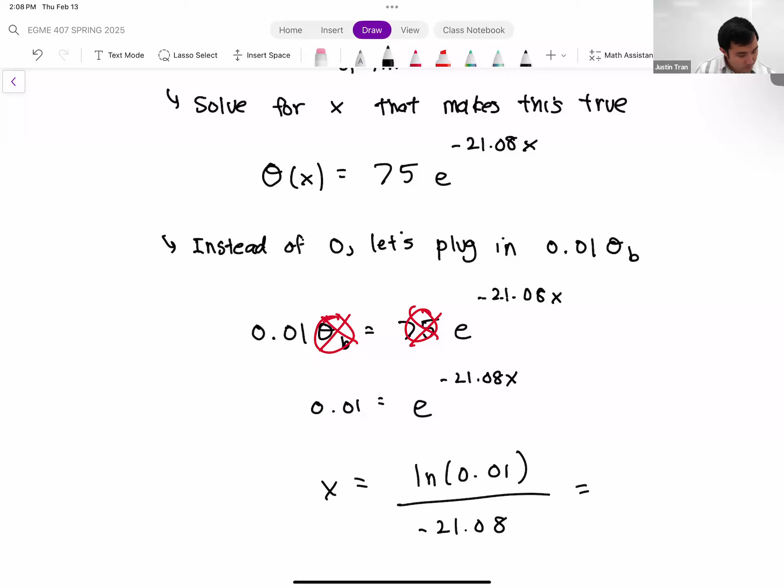So if we compute that, plugging in the numbers, we get 0.22 meters, which is actually pretty reasonable, right? So 0.22 meters, that's 22 centimeters. Not super unreasonable. But remember, the diameter of the fin is only 5 millimeters, so it's going to be a very long, slender fin. Any questions on this?

Student: Should it be like a ratio? Yeah, essentially it is. I kind of mixed the variables here, but what we're assuming is that the temperature difference goes down to 1% of theta B. Remember, our original solution had theta B on that side too, so the theta B's cancel out. So we're basically solving for the point where the temperature difference is 1% of what it is at the base.

Last thing that I want to cover, and then we'll wrap up with fins: this idea of fin performance. Now that we have a strong understanding of fins, we can compute its temperature distribution and its total heat loss. We want to have some kind of metric or way to rate how well the fin is actually performing its duties.

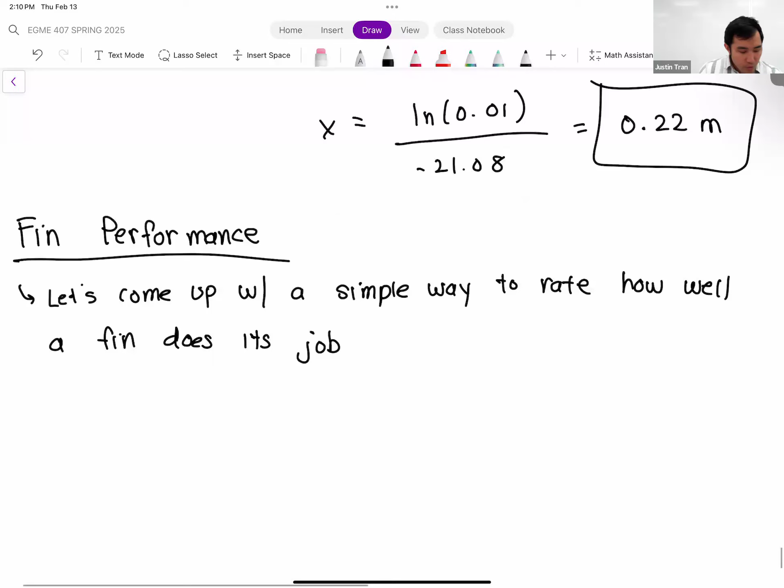Because it's one thing to say that this fin is going to offload this amount of heat, but sometimes it's better to come up with just a performance metric, and in this case it's actually quite simple to do. So the way that we rate this is through a metric called fin effectiveness.

I'm going to give you the general definition for fin effectiveness, but then we'll go through the actual specific one for the long fin that we're considering. So fin effectiveness, the symbol for that is epsilon f, is equal to QF divided by H, AC, theta B.

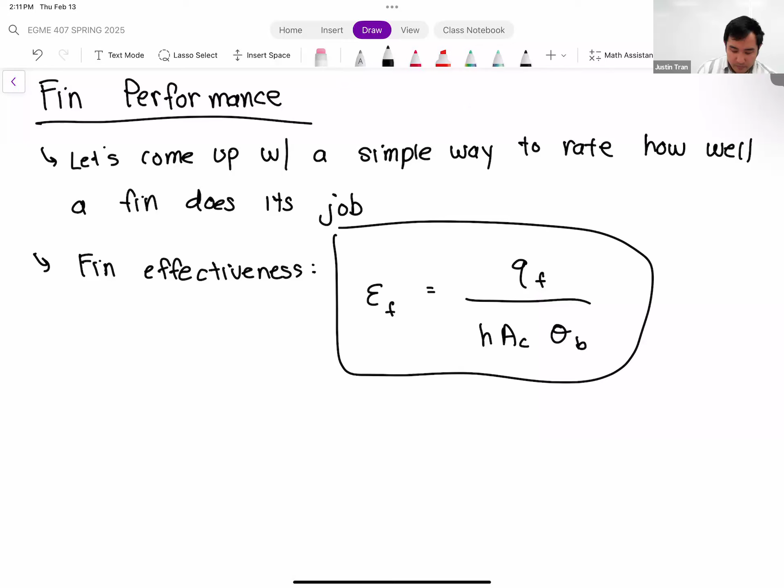This expression here is a ratio. The numerator represents the total heat loss from the fin, and in the denominator, what we have is the total heat loss from the surface if there were no fin in place. In other words, we're comparing a situation where we have our fin, and this fin has a heat loss QF, versus if we just have a flat wall instead of that fin. In that same section of area where that fin would have been, we're still going to get convection heat loss there, but it's not going to be as much.

So one way that you can interpret the effectiveness is you can interpret it as how much the fin is going to amplify heat loss by being present.

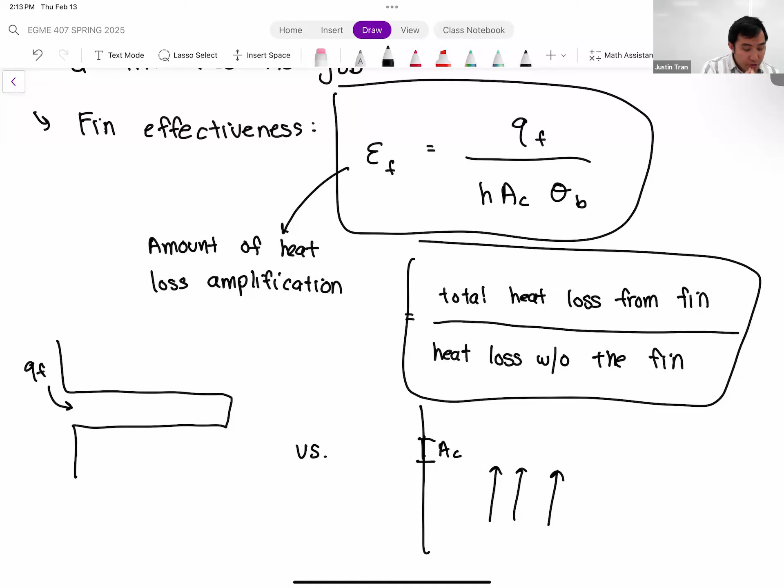So for our case, we can actually plug it in, right? Because if we plug in our expression for QF, since we have derived one for a long fin.

We can get a slightly more specific version of this, although this expression here is perfectly valid as well. So you can use this.

In fact, this is the one I typically use when I'm doing calculations too. But if you want to plug in, because we have this expression up here for QF that we just went over about 15 minutes ago, we get effectiveness equals the square root of KP divided by HAC.

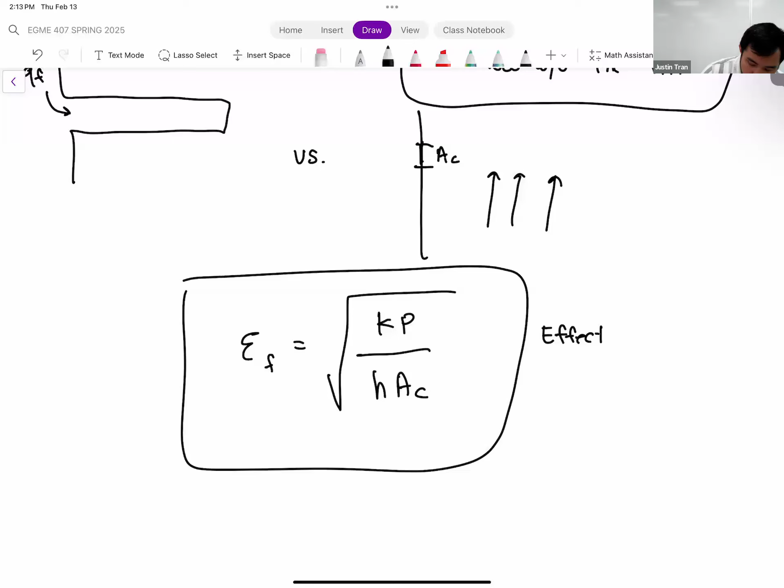So this is effectiveness for a long fin.

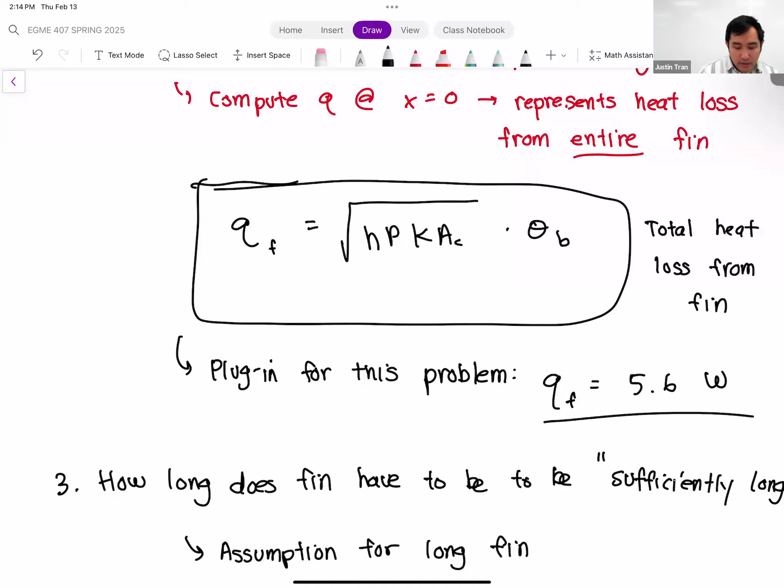So the numerator in the previous effectiveness expression was QF. All I did was plug in this expression for QF, which is what we derived for a long fin. The theta b's are going to cancel out, and some other terms cancel out as well.

We're just out of time, but let me give you this, because this is a ratio. I think the question everyone asks is, what is a good effectiveness? Generally, if your effectiveness is greater than 2, this is usually pretty good.

Of course, you want to be higher than this, ideally. If you're closer to 3, that's actually much better.

But as long as your effectiveness is greater than 2, that means your fin is actually doing something. If it's less than 2, it's amplifying heat transfer a little bit, but it's not as effective, or it's kind of not worth the trouble. So you may want to think about redesigning your fin.

One thing I want you guys to think about, especially for the next homework assignment, is to look at the parameters in this formula and think about how they affect the effectiveness. How does the thermal conductivity affect it? The perimeter, the cross-sectional area, and the convection coefficient.

All right, that's all we got time for today. When we come back on Tuesday, we'll start talking about shape factors and 2D conduction. Hopefully that's not going to take too long, and then we'll move on to time-dependent conduction from there.